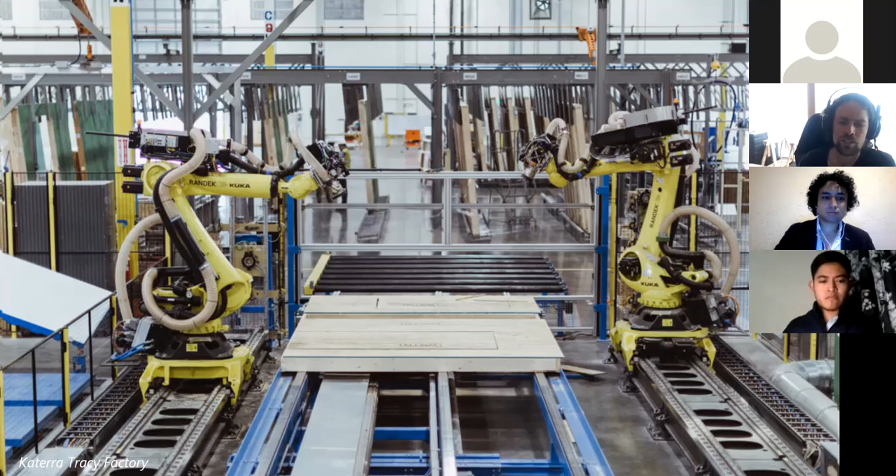And really that background and context is kind of a reaction to the trend that we're seeing in our industry at the moment towards industrialized construction. So companies like Katerra, I'm not sure if anyone's heard of Katerra before, but they're technically a startup that's trying to own the entire production chain for the manufacturing of buildings. Companies like Katerra, they're trying to standardize and automate this entire production chain so that they can extract every little bit of value from that chain and make money.

And the way that they're doing that is they're able to make money by essentially making the fabrication process less risky, more precise, more repeatable, cheaper, faster. That's what they're achieving by implementing industrialized construction processes, you know, automating things with robots and what have you.

Now, for companies like Katerra, and generally speaking in this future where we're building buildings within factory environments with machines, the role of the architect is going to be that of a specifier. So the architect is going to largely be selecting finishes and modules from a predetermined kit of parts that have been highly optimized for this particular production chain. That's what an architect will do. And I think that future is quite dystopian. I think that we're at risk of optimizing out what is exciting about architecture and design in the pursuit of efficiency and profit.

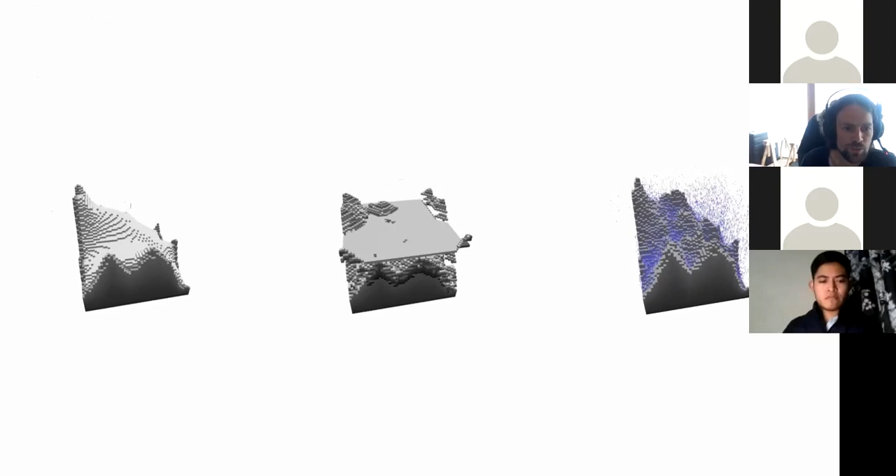So when I began my research agenda, which is all just leading up to what we're doing at Hologram, I had pretty limited time and resources to explore this idea of slow robotic fabrication. And so the only way to really explore the agenda was through simulated digital worlds. So trying to essentially speculate on what might happen if you had a robotic system gradually fabricating something over time, rather than literally doing that with robotic systems. Just didn't have the resources.

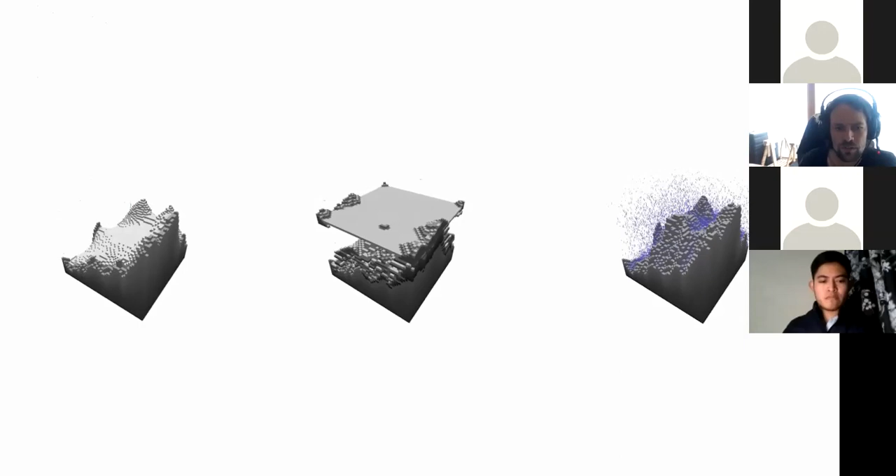So it became important as a designer to be able to build design tools that could simulate physical phenomena over virtual timeframes. So these are some examples of little miniature worlds that are doing these things. They're simulating processes of material erosion or material deposition or flow over a landscape over time. And by combining these simulated phenomena, it becomes possible to produce really, really complex formal objects, and to begin to speculate again on these kinds of qualities that just emerge by having, in this case, a fictional simulated robotic agent take very specific actions within that environment in order to produce desirable formal and spatial effects.

So again, the idea here is it's something which is slow, it's something which is specific to material behaviors, it's a kind of negotiation between the intention of a designer and the characteristics of an environment and a material. It's something which is definitely not standardized, precise, repeatable. It's something which has nuance, specific character. And in this case, these are a bunch of salt landscapes. It was the first speculation on what sorts of objects these processes might produce.

Then after doing that kind of work, these initial speculations which are all just virtual, I began also thinking about how this might work at smaller scale. So this is a project for a meeting pod at RMIT. And it was a competition. Essentially, the idea was to create a meeting pod by robotically depositing extruded and inflated recycled plastic bubbles.

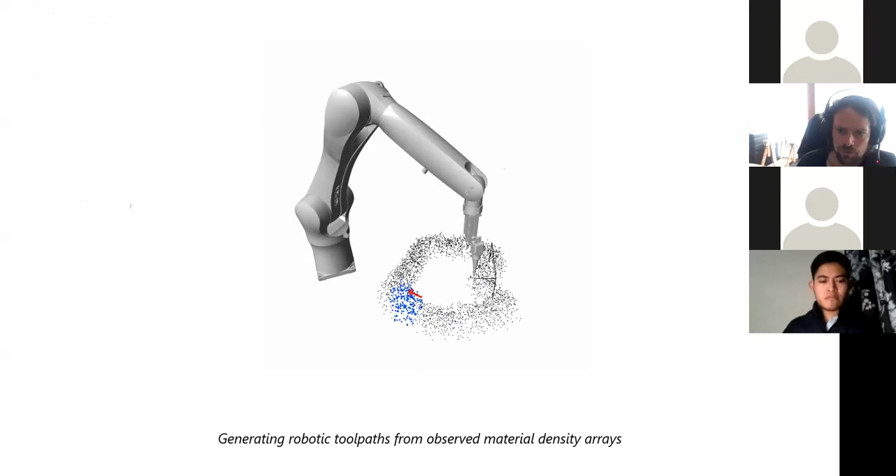So the first thing that we tried to do to build this impossible to build pavilion was to solve the computer vision problem. So the robot, in order to fabricate structures like this, really needs to be able to see the space that it's in. So we set up an environment where we had multiple scanners. Some were mounted to the robot, some were just set up in the environment, that could produce essentially a 3D model in real time of the material that the robot was working with.

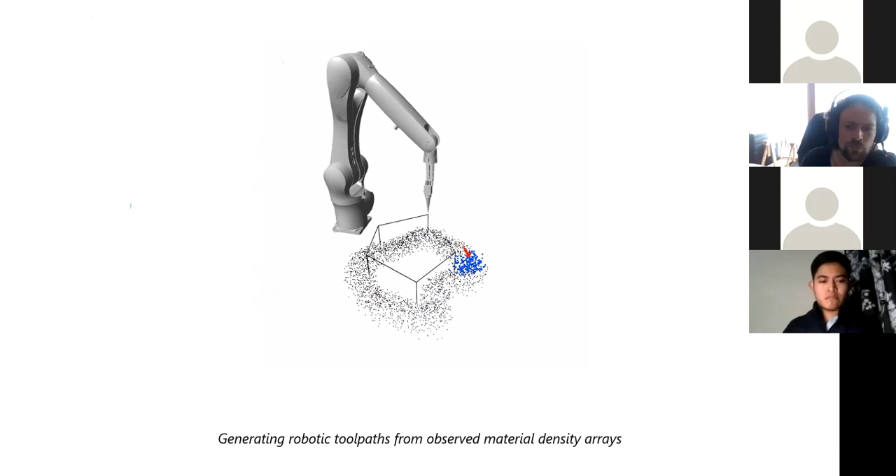And then we ran essentially behavioral models that would control where the robot moved. So it would observe this point cloud of its environment, or actually it was a voxel grid. It would observe that voxel grid. It would run some algorithms to determine how it should move next. It would place some more material. That would then affect the voxel grid, and it would just repeat. So you have these completely bottom-up autonomous systems of fabrication.

This is what that looks like running. So this was in 2016 in a workshop with Roland actually, and Cam Newnham for RobArch. And the robot here is depositing some expanding foam. It's basically always scanning that model that it's creating from foam, and then deciding where to place more foam following a behavioral model. The behavioral model is really simple in this case. It's just trying to put more foam on top of the foam that it can see. So you have this tower building behavior, basically.

So this is something that's extremely simple to do for a person. If you asked just about anyone to just put more foam on top of the foam that's there, anyone would be able to do that. It's trivial. But for a robot, this is actually a fairly challenging task. You end up having to develop a ton of different systems just to place material on top of what's already there. And so that also is kind of frustrating. It's just extremely difficult to teach machines to do what is extremely simple for people a lot of the time, especially when it comes to craft-based practices where you're trying to respond to material.

But essentially, as a proof of concept, we solved the computer vision problem. It's possible to observe material and place more material on top of what's already there. So that got solved. And then the next challenge was to try to work out how we could extrude this plastic. So the plastic in the DAB pod, we wanted to be able to control the color of the plastic. We had to control the size of the bubble that was being placed. You had to control the density of the material. There are a whole lot of things that we needed to be able to control directly from digital models, essentially, in real time.

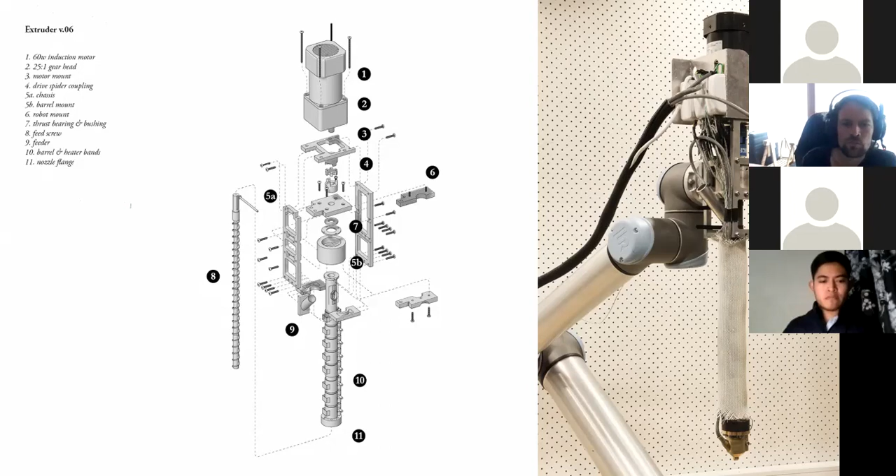Ours was very limited by having to go on the end of one of these UR10 robots, which is a pretty low payload robot, it's about 10 kilos. But what was special about our plastic extruder is we had the ability to mount custom dies on the end of the extruder. So you didn't just have to extrude a solid section of plastic like most 3D printers, but you could pretty much design whatever profile you wanted and then extrude that.

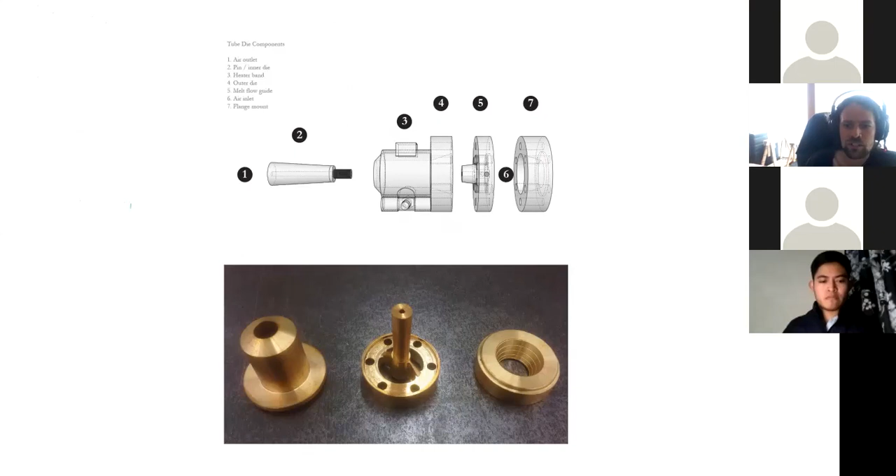So we designed a tube die that would go on the end of our plastic extruder, and this tube die had an air inlet built into the center of it. So you could control the amount of air pressure that was being pushed into the center of this tube while you're extruding it. And when you control that air pressure with a digital pressure regulator, you can basically drag a slider in Grasshopper and change how much air is being blown into the center of this tube. So while you're extruding it, you can also be inflating it.

And this was also really, really interesting. We were basically able to make these kind of inflated plastic bubbles entirely controlled through a slider in Grasshopper while the robot was printing. And they had a whole lot of characters that we didn't anticipate in our digital models. Essentially the plastic behaved in a far more complex way than we were simulating. It produced all of these strange ridges and ribs in the extrusion, which also reinforced the bubbles. So these were extremely thin-walled plastic bubbles, thinner than a Coke bottle, but they were also quite strong because of the way these ridges reinforce them.

And so I think there was a really interesting opportunity here to do so many things at once. First of all, printing with tube that's inflated is way faster than printing with solid section because you're extruding the same amount of material to create way more volume. So it's a faster fabrication process. That also means you're using less material, so it's a far less wasteful process, which is great. What you're producing is more performative. If you're trying to create insulation, for instance, this is a fantastic way to do it, extruding tube rather than extruding solid section.

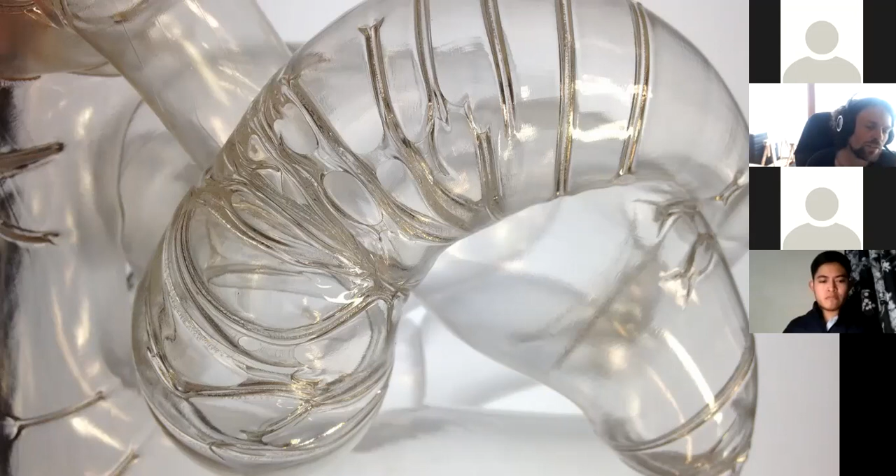So at this point, we'd proven it was possible to control the robot in real time. It was possible to make tools that would be able to extrude and control this plastic. It was possible to autonomously write behavioral systems that would allow the robot to fabricate structures of the complexity of that pavilion design. But this was also about the same time that we got the HoloLens. So this was late 2016, about almost 4 years ago. We got the HoloLens at RMIT, and when we got the HoloLens, we realized that we could achieve all of the same things without needing to go through all of the hoops of programming robotic arms.

So I'm just going to check, I don't have my chat window open, so I'm just going to turn it on now that I've got a second. I'll check this chat every now and again. So if you guys do have a question or want to interrupt, either just turn your microphone on and interrupt me or ask it in chat. But I'll try to check it.

Yeah, so we got the HoloLens, and what I wanted to do is essentially show you a very behind the scenes look at what we did with the headset when we first got it, because often in these sorts of talks, you only show the things that work really, really well. You don't show the failures or the stupid ideas that you have when you first try something. And I thought this is a good opportunity to actually share those with you.

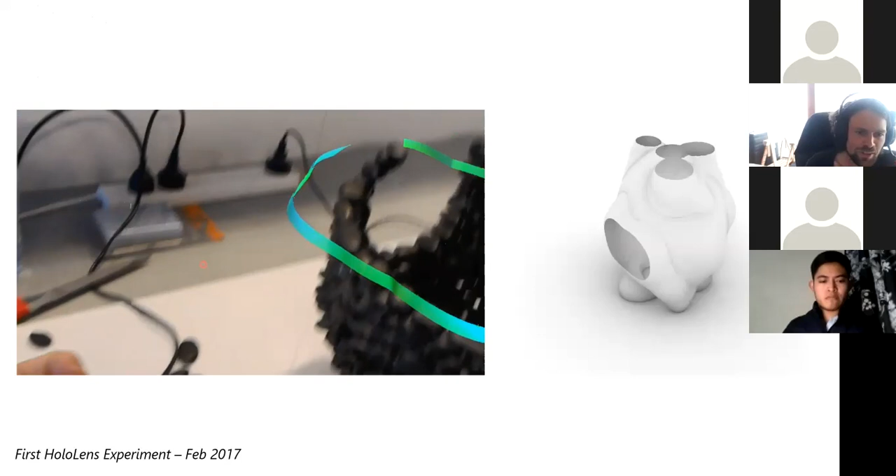So one of the first things that we did with the headset was, let me just make sure that plays. We thought, okay, maybe we can invent new 3D printing processes. So maybe we could print with river pebbles, which are all these strange and different shapes, and hot glue, rather than printing with entirely predictable standardized materials. So we got the HoloLens, we modeled some weird little blobby thing that we thought would be difficult to build without the HoloLens. Then we got some river pebbles and just experimented with different ways of communicating in mixed reality how to make this shape.

So what you see here is we're just looking at one section of the shape at a time. It's sort of like one layer, I guess, of these river pebbles. And we built some software that would just let us fabricate things like this as easily as possible.

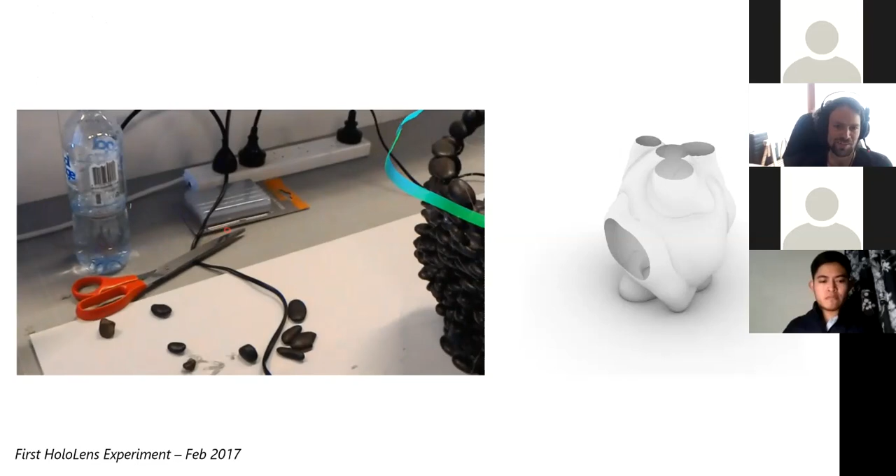So what we figured out very quickly that we needed to do was, we weren't really sure what information we'd need to build these objects. We didn't know if showing a contour like this was going to be best, or showing the whole model would be best, if coloring it would be useful, or if we should show it as a point cloud. We didn't know if we'd want to change things, move it around. All of these were just unknown.

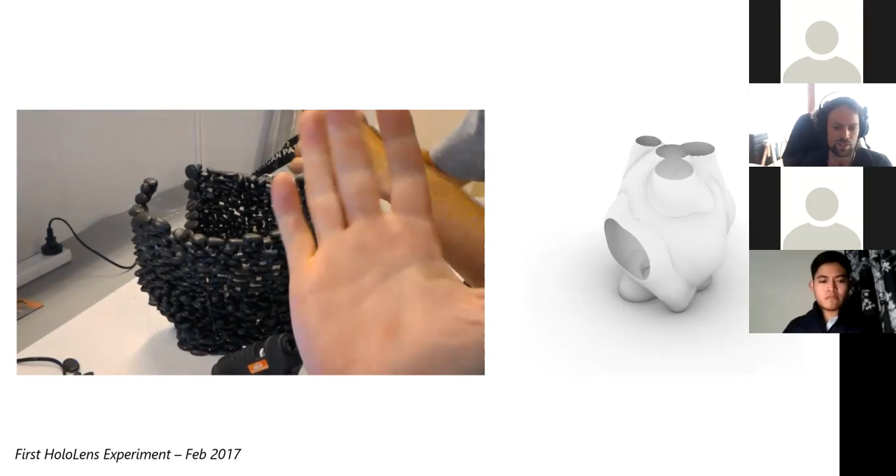And so we had to make some software that let us make all of these changes to what we saw on the headset as quickly as possible, so that we could test ideas and work out how the headset was actually going to be useful to build things. What we initially did was we sort of mocked up a way to stream Rhino models to the HoloLens. So what you see in Rhino, you would see on the headset.

And then with a bunch of students at RMIT, we sort of tested this out building different structures. So you would model something in Rhino, you'd look at that same model on the headset, and then you try and build it. And what that let us do is basically eliminate all of the complexity which normally goes into any sort of digital fabrication process.

So ordinarily, if you're doing something with digital fabrication, there's a ton of work that goes into rationalizing your design into 2D parts so you can laser cut it, or designing funny little connection details so you can join 2D parts together. All of this is very skill intensive and results in a really steep learning curve.

And by instead just allowing students to draw something and send that over to the headset and then just fabricate it by welding little bits of steel rod together, it meant that this kind of feedback loop of designing and then building and then learning was just way quicker, which meant that you could develop skills also much faster.

So it eliminates this kind of stuff, where you might have a whole bunch of digitally fabricated parts, but then you just have tons and tons of drawn documentation that shows in a very complex way how to assemble those parts together into some object. We basically want to avoid this as much as we can when you're working with mixed reality.

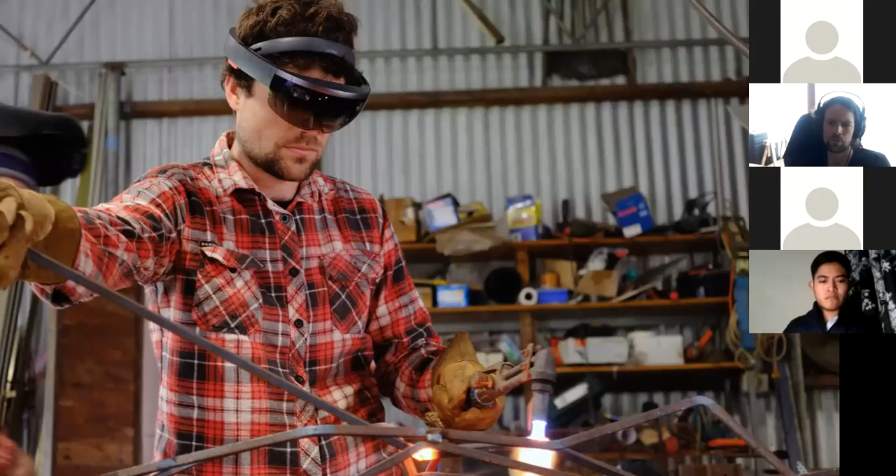So working from holographic models, we found, could invert the problem space of fabricating complex designs. By that, I mean, when you can see exactly what it is that you're trying to build while you're making it, it becomes possible to approximately build just about anything very easily. Doesn't matter how complex the form is, you can always approximately make it, and that's always really easy.

And ordinarily, with both traditional fabrication approaches and digital fabrication approaches, making things which are complex is usually all or nothing. So you either get it exactly right, and that's usually very difficult, or you get nothing if the part fails. It's not really possible usually to make things approximately, because that usually introduces a cumulative error.

So to give you an example, this is one of the first projects that we made out of construction scale materials with the HoloLens. It's 10 mil mild steel square bar. And this was just a quick digital mock-up for a chair designed in about 20 minutes. And it's very quick to design because there's no rationalization.

It's all unique parts, everything's intersecting, everything's in 3D, nothing's in 2D. There's really no fabrication constraints in this model whatsoever. It's just a 3D sketch. But it captures some design intent. It captures how big things should be, how the top of the chair should work, what the formal language should be, how the structure should work. All of that's in this sketch.

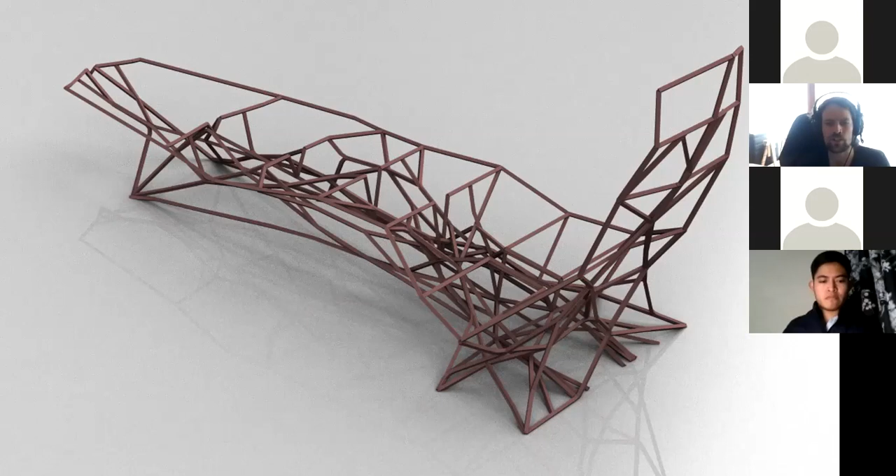You're heating up some steel and just bending it into the shapes that you see on the headset. It's an extremely simple fabrication process, and so it's extremely fast. So we didn't end up using a single drawing. There were no measurements, no templates, no jigs, nothing was laser cut, nothing was done robotically. Everything was just done by hand with an oxy torch, and that's it.

So we're slightly moving parts around whilst always making sure we're actually capturing the design intent. You can always see what the finished object is supposed to look like. So if you change one part, you have to make sure it's still capturing that design intent. So it's a deliberately imprecise object.

This idea of making in mixed reality is definitely not actually new. Like we didn't come up with this idea. It's not our brilliant conception or anything. The idea of using mixed reality to make things has been around since the technology's conception. So two engineers at Boeing in 1992 first came up with the term augmented reality, and that was used to describe a system for assisting with the manufacturing of aircraft wiring.

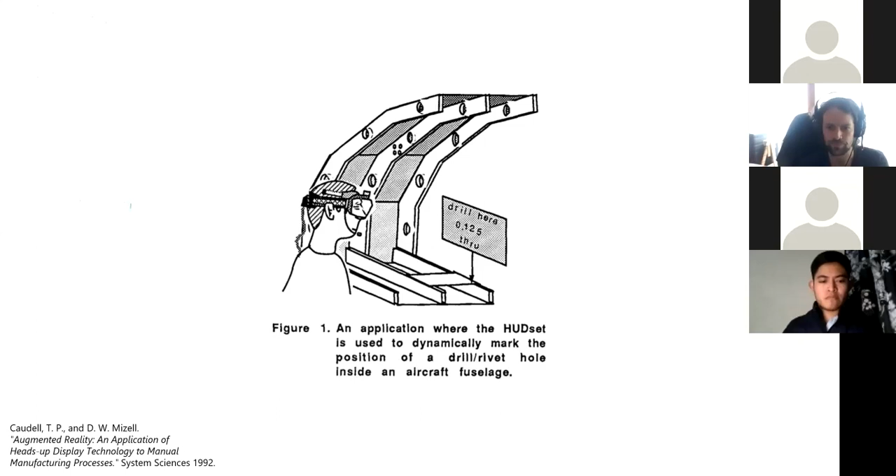However, very few people at least are building directly from these mixed reality models yet. That's what we're doing at Fologram. That's still fairly unique to what we're working on. Mostly they're just used for checking things after they've been built.

Now, compared to these mobile phone experiences, which are fairly commonplace, what we generally work with is the HoloLens, as I mentioned before. The massive advantage of the HoloLens over the mobile phone is that you wear it on your face, and so you can still use your hands to interact with your physical environment. You don't need to hold a phone in front of you, and you see holographic information with accurate depth perception. So you really experience things in 3D. You're not experiencing them as a 2D projection onto a screen, which again is essential if you're trying to use that holographic information to place something in 3D space. It's really hard to do from a 2D screen. It's really easy to do when you can see it in 3D space.

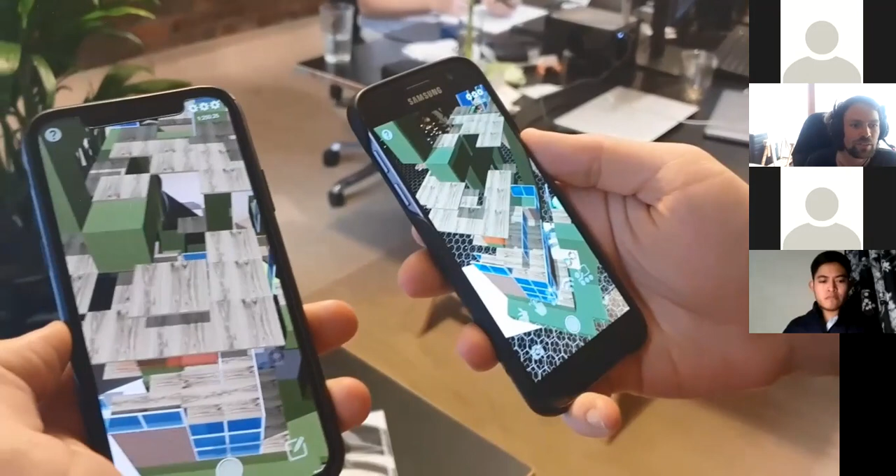The other thing that you can do is build multiplayer applications. So it's possible essentially to have 2 people or 10 people modeling into the same Rhino environment at the same time. So again, this is all built entirely just with Rhino and Grasshopper. It's a little application. It's a bit like Minecraft. It lets you copy a layer in Rhino and then paste the objects in that layer anywhere in space.

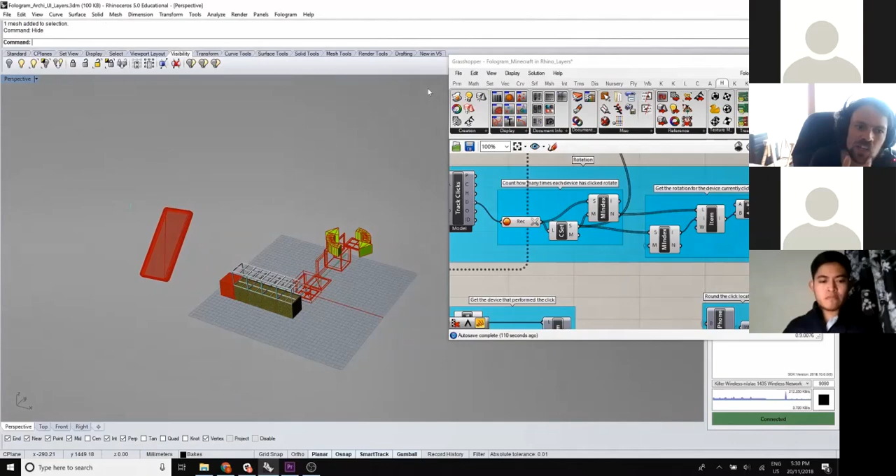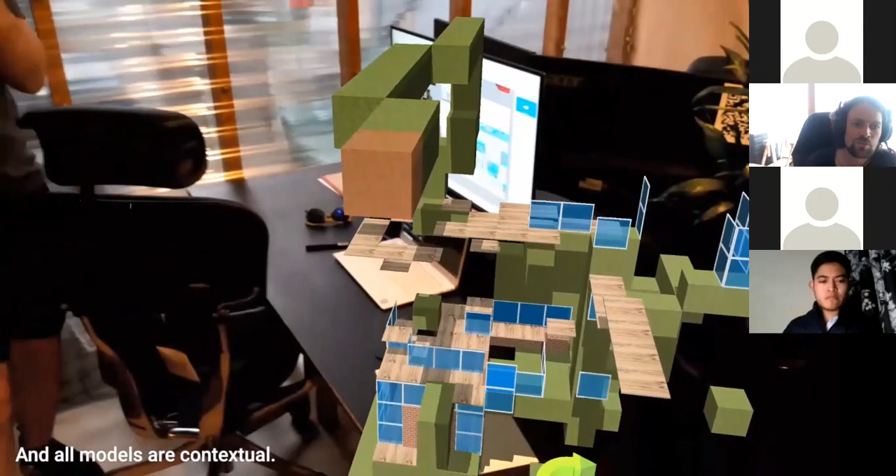And any mobile phone or HoloLens that's connected to Rhino can do this. So you can have multiple people all tapping and placing these blocks, and it just becomes like a collaborative modeling exercise, which is really, really great for engaging people who maybe aren't actually experts in those modeling tools within design processes.

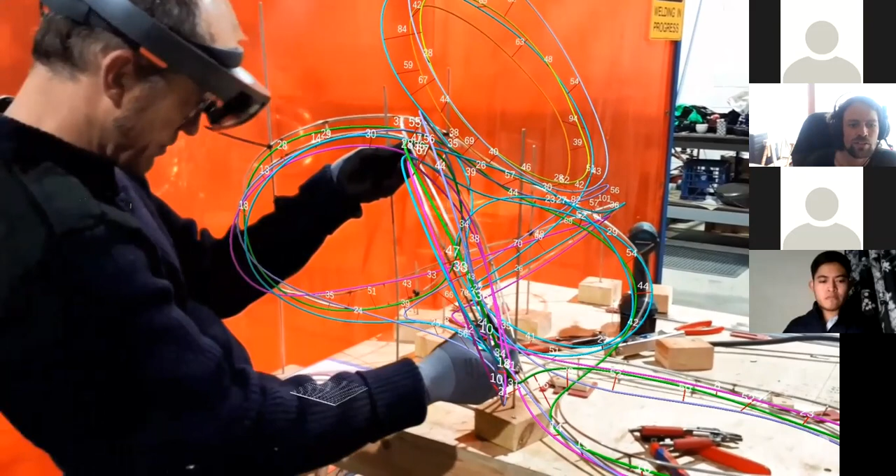We've had artists who work primarily in virtual reality use the HoloLens to fabricate these objects. So this is Jeff Farquhar Still. He designs these crazy complex 3D curved objects that are really difficult to make from drawings. And with the HoloLens, you're able to just look at them in 3D space and fabricate them, just as easily as anything else.

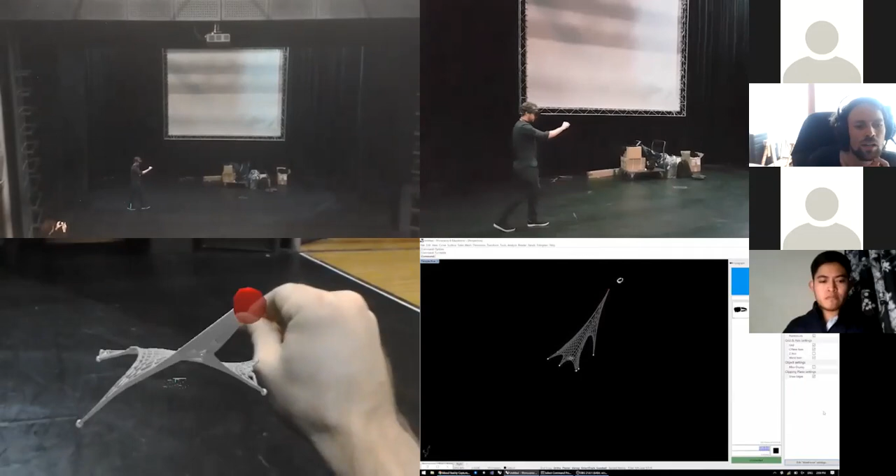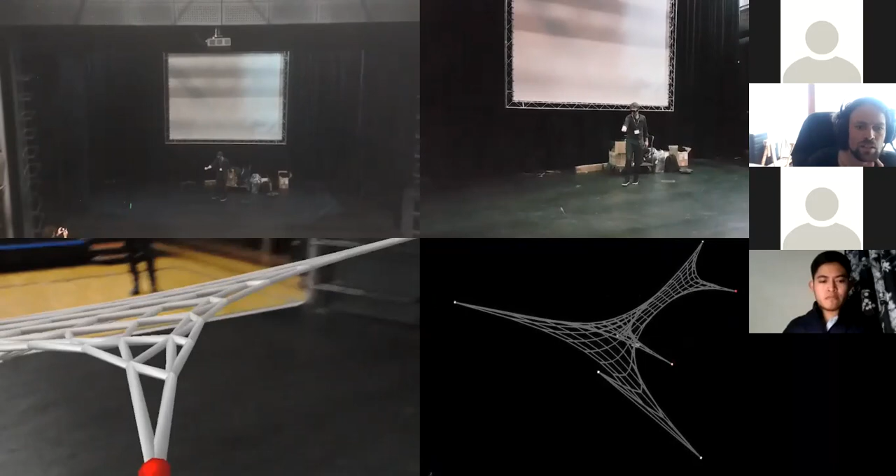You can interact with Kangaroo simulations in mixed reality. So that lets you do things like run one-to-one full-scale physics simulations for simulating things like tensile nets. It's possible to run robotic simulations from Grasshopper and align the coordinate space of the robot with the coordinate space of the HoloLens. So you can preview robotic toolpaths and things like that in mixed reality to avoid clashes or to anticipate exactly how a robot's going to move through its joint space. All of this is very possible and very simple using Fologram with Rhino and Grasshopper.

All right, so that is the full shebang in terms of the context, like how we got to where we got to. Now I want to show you, I think it's 2 or 3 projects in the next 20 minutes or so, to just try to, I guess, convince you of the effect and impact that mixed reality is going to have on design and fabrication.

And we've done a few of these demonstrator projects that have gotten more ambitious and more complex over time. The first one that we did was in 2018 at Tsinghua University in Beijing, where we just built a pretty simple little pavilion structure, but we designed it, did all the design review, all of the fabrication, all the assembly, and all the post-build analysis entirely in mixed reality. So we were trying to sort of prove that it was possible to do this end to end.

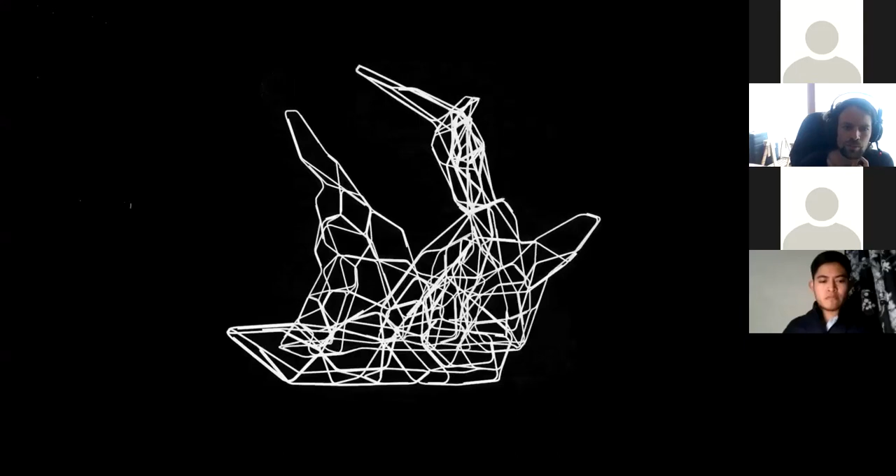So this is the design. It's like a very deliberately complex thing. It's a bunch of woven bent steel rods. They all kind of thread through one another. It's a real kind of tangled mess. And we're just trying to make something as formally complex as we could at the time. So that was the design.

And this is where we were building it. And because the site's pretty complex and the object we're making is pretty big, we wanted to make sure that we'd actually be able to fit all of the parts we're fabricating through this space and get it to the exhibition. And what you're seeing here is just the 3D scan of the space that's built up on the HoloLens as you walk around. So the HoloLens is always creating a 3D model of the space that it's in.

You can stream that point cloud straight into Rhino and Grasshopper and use it to determine, okay, will our part actually fit up this ramp? Is it going to fit under this soffit to get it into the exhibition space? Will we be able to fit it around the columns? All of those things are just really, really useful to know with this project. And again, we were able to determine them just with a site walk with the HoloLens.

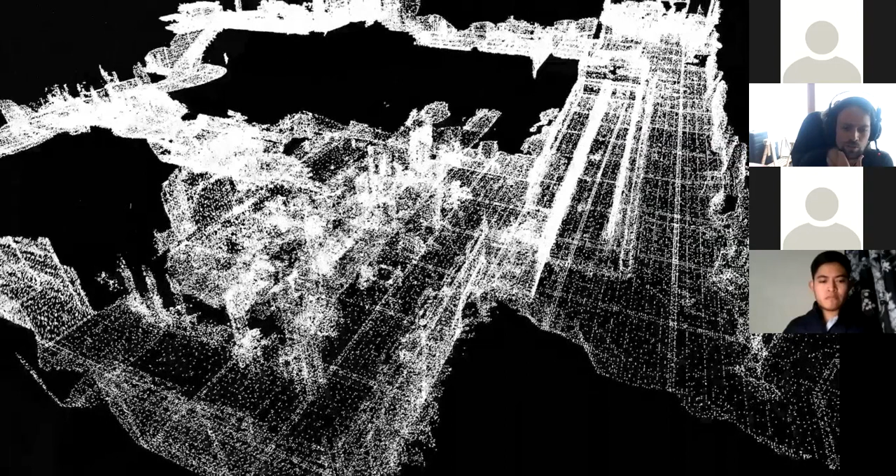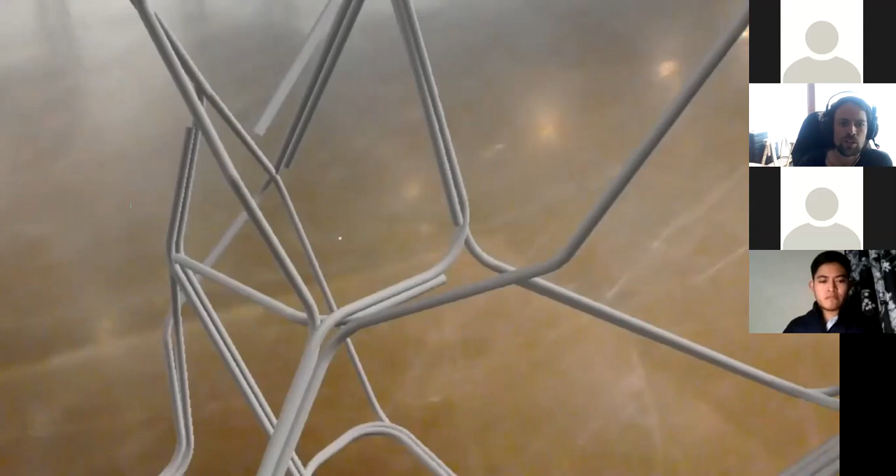Another thing that we did was to just make sure that this structure was buildable. So it's really, really hard to understand something that's composed primarily of curves when they're just projected flat on a screen. So things like being able to see how these curves would join, whether or not we were missing joints or had too many joints, whether the parts were intersecting, whether we needed more connecting pieces. All of this was just way, way faster if you were able to walk around the 3D object than spinning around it on screen.

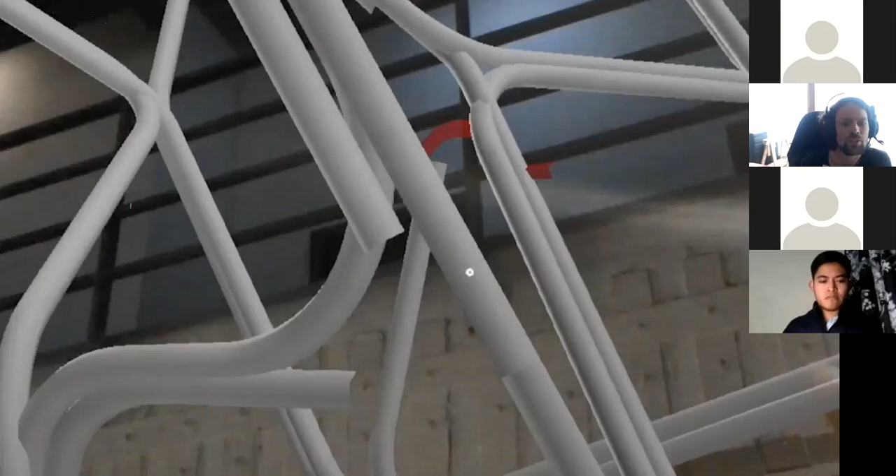And so what you're looking at here is both of those things happening at once. So I'm walking around wearing the HoloLens and just marking up this object. The markups are streamed straight back into Rhino. And then Cam was able to change the design model in real time, and I could just approve it. I could say, yep, that looks better. That's done, it's fixed. And so it's just a super, super fast review process.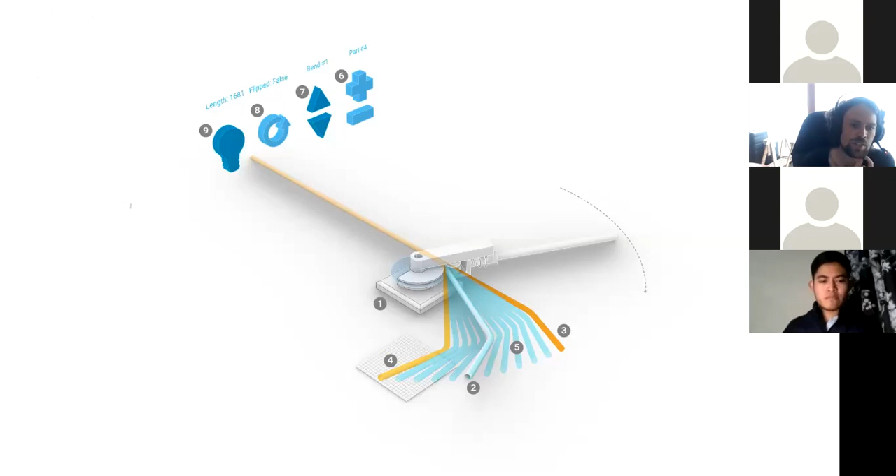Then to fabricate each one of the parts, we had very little budget. And so we built all of these parts with an extremely cheap bender that you see in the background here. And because each one of the parts was unique, we had a holographic guide which showed the geometry of each one of these bent pieces. And we had an interactive application that let us step through the individual bends in each one of those pieces so that you could just focus on that specific fabrication information, one thing at a time.

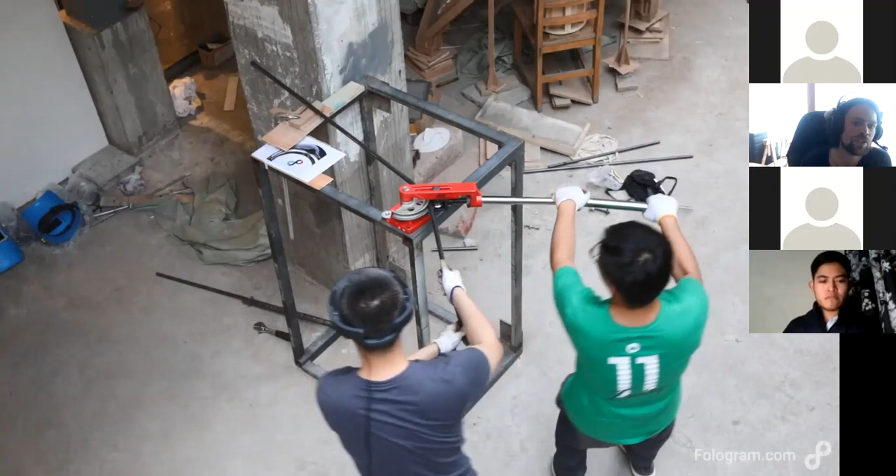Just like with the Boeing diagram that I showed you earlier, the critical thing you need when you're fabricating something with a HoloLens is to just minimize the amount of digital information you're showing to help you perform some otherwise complex, challenging task. So here we have the students following these holographic guides, bending these pieces. You can see up here, there's the interface they're using to step through these individual bends.

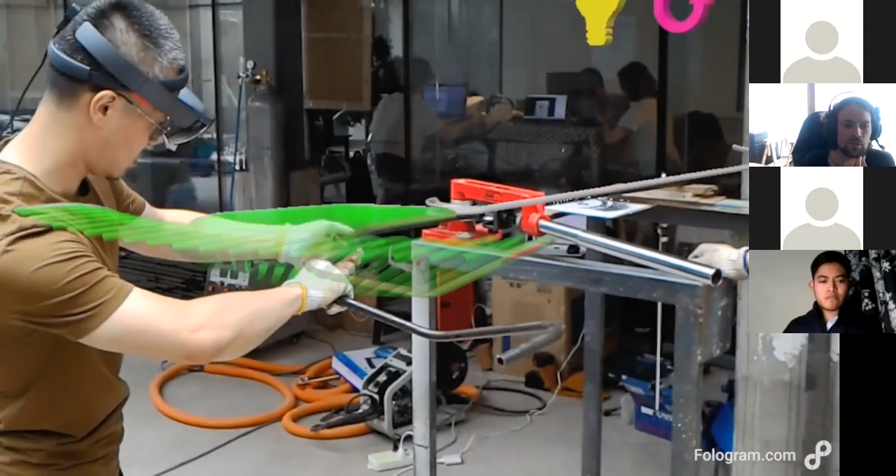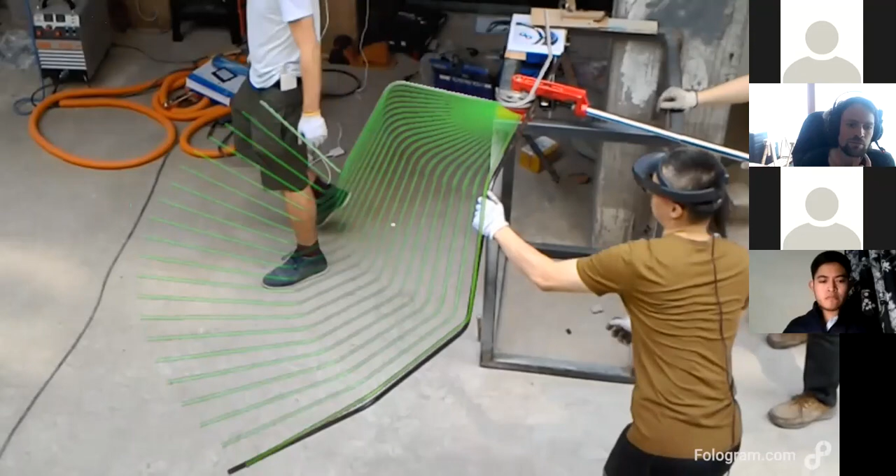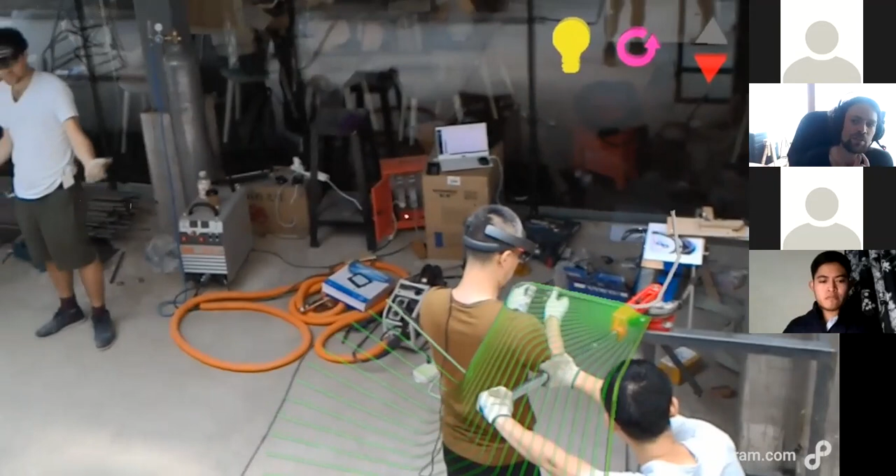And to fabricate each part, it's really, really simple. All you're doing is lining up the physical pipe after it's been bent with the virtual pipe, and then just bending it around until it continues to line up. So here you see them doing that bending. Once it lines up with the hologram, you know it's right. So there's no measurements, no drawings, no labels, no templates, no jigs, no nothing. Just bend it and then assemble it.

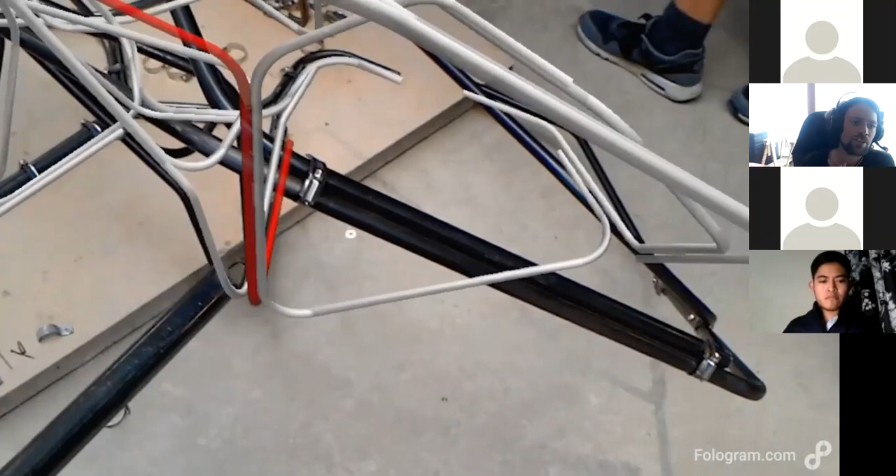So that massively simplifies the documentation that we need to do. We can rely on the fabrication team to make intelligent decisions during assembly and build things up without a cumulative error. So here you can see the red piece. We had another really, really simple interface that lets you step through the current piece being assembled and just check that they're all in the right place.

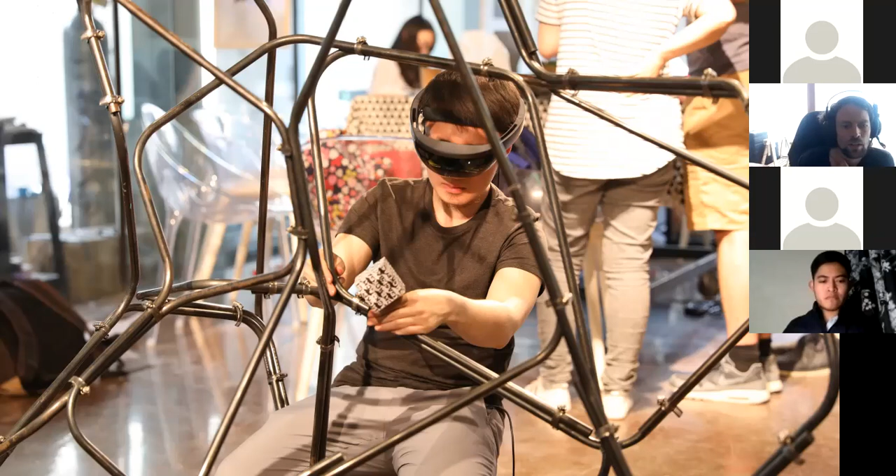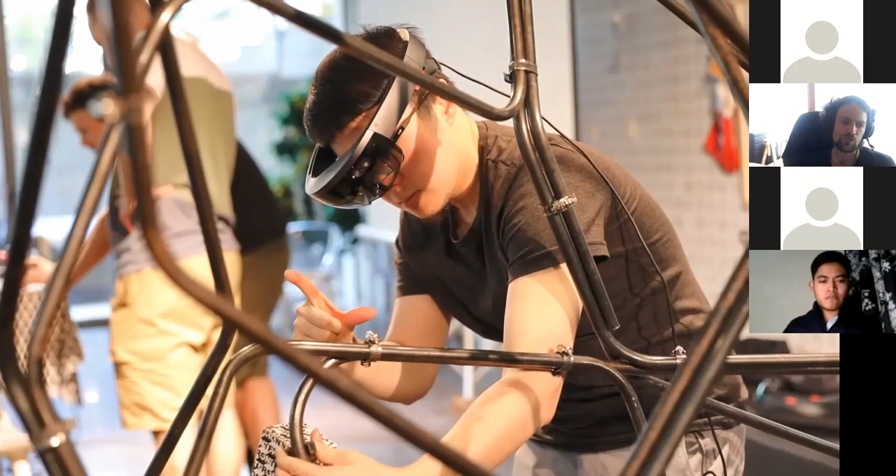Once it had been built, we wanted to digitize it to make sure that it was precise, or at least to be able to say how precise it was. And yet again, as always, we used the HoloLens to do that. So we were able to track a marker with the HoloLens, just a printed fiducial marker, and take the tracked position into Grasshopper and essentially just place points in space and redraw the curves of the physical structure so that we had a digital model that exactly overlaid that physical object.

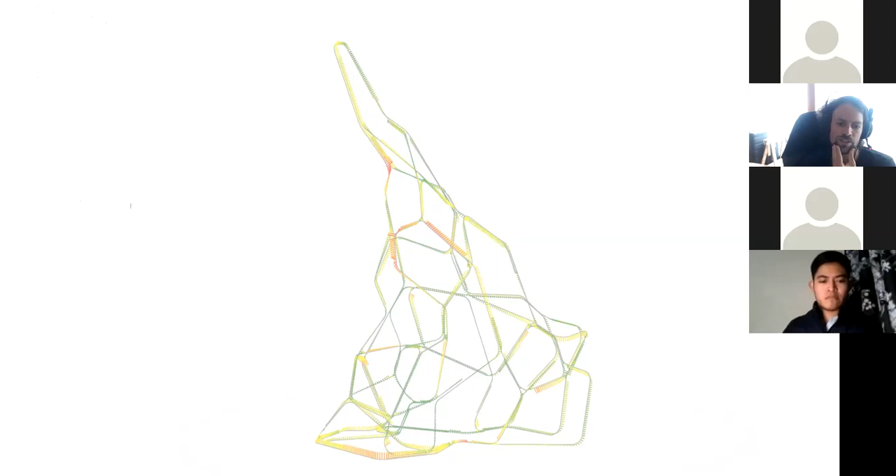So then we could compare what our original digital model was, so the model that we used to fabricate the object, which is this one here, with our digitized model, which is this one here, also showing the deflections, and just measure the difference. So this is before build, this is after build. And then that's the actual physical thing.

So what we found was the maximum deflection of this object, I think, was about 25 millimeters, and the average was 16 millimeters. And this is from 16 millimeter tube. So that precision, for something that's made entirely by hand by people who are using the HoloLens and a bender for the first time, is entirely acceptable.

We've also tried working with the HoloLens on construction sites. So not doing really sculptural pieces, but trying to work with industry and with trades, specifically with bricklayers. And the reason that we're able to essentially engage trades with new technologies is three reasons. One is it's very easy, we've found, to get tradespeople to engage with the HoloLens because they don't really need to learn any new user interfaces. You just put the headset on. If you see a big button, you can reach out and push it. That's easy enough for anyone to do. It doesn't require a lot of expertise just to use the device.

The other reason that we've got a lot of uptake is these mixed reality experiences, they're always shared. So you can easily train somebody, walk them through what they should be seeing, walk them through how to interact with the digital content and all the rest of it, just by both wearing a HoloLens, both looking at the same model in the same place.

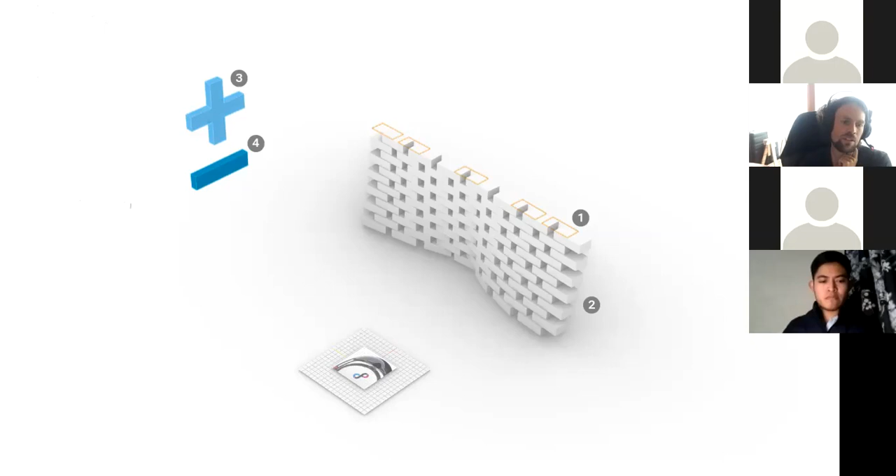Initially, we were just doing really, really simple prototypes ourselves from foam blocks, extremely simple mixed reality applications. So you have two buttons that you can interact with on the HoloLens for changing the course of bricks that you see. And you're using that holographic information just to place bricks. It's extremely fast to use these applications.

So this was a structure we built of about 4,000 foam bricks. Oh no, sorry, it's about 2,500 foam bricks, I think. And it took about 4 hours to build. It gives you an idea of the precision of these processes, because basically if any of these bricks are in the wrong spot, they really stand out. And so we thought that was a good enough test to try doing this at full scale with mortar.

And I've just got a little video that shows you how that went. Now this video does have some rude language in it that's not beeped, I think. So if you are offended by that, maybe just mute your audio for the next couple of minutes or so.

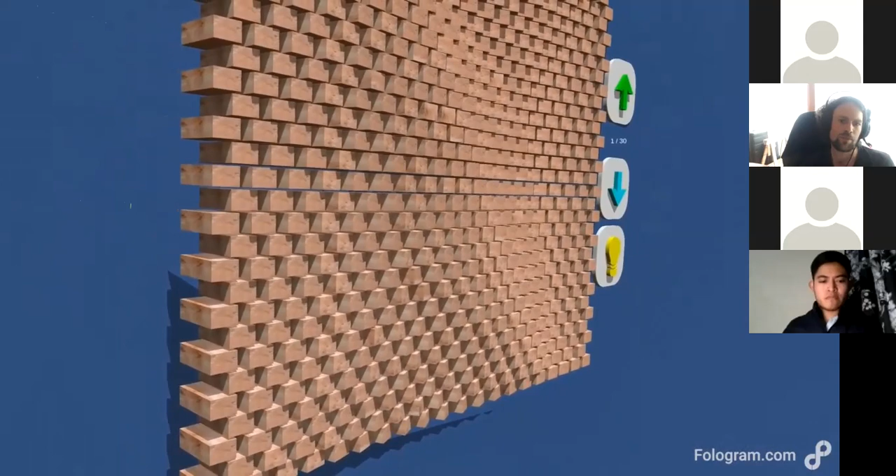So this is the project. It's a small feature wall, about 600 bricks. This is the digital model, really simple holographic information, and showing you all the bricks. And this is Colin talking about it.

There isn't a single brick on there that lines up to anything. Every brick is different. This would take you like 2 weeks. Yeah. For one guy, and a lot of that would have to be, you know, made up. Do you know what I mean? You're not going to get it exactly like this would be.

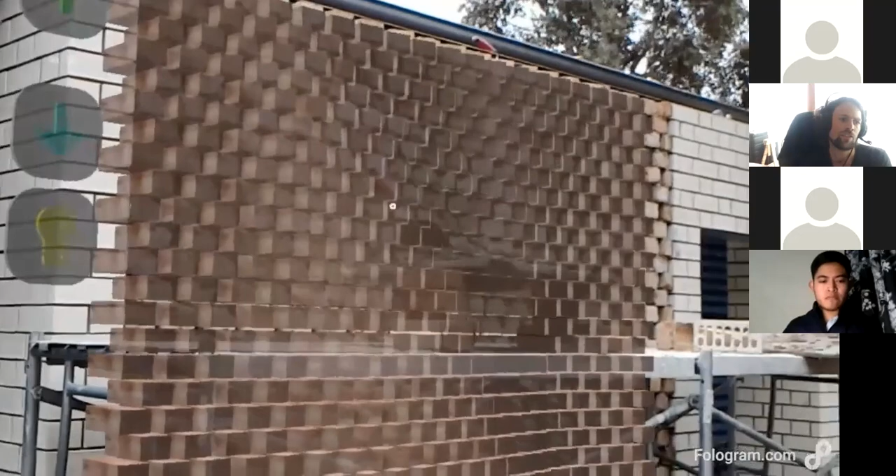So they're using that same interface. Basically, you have multiple people able to look at the courses of bricks as a hologram, and they could use that for all sorts of things, not just placing the bricks, but also training apprentices in how to do brickwork, which was really, really exciting.

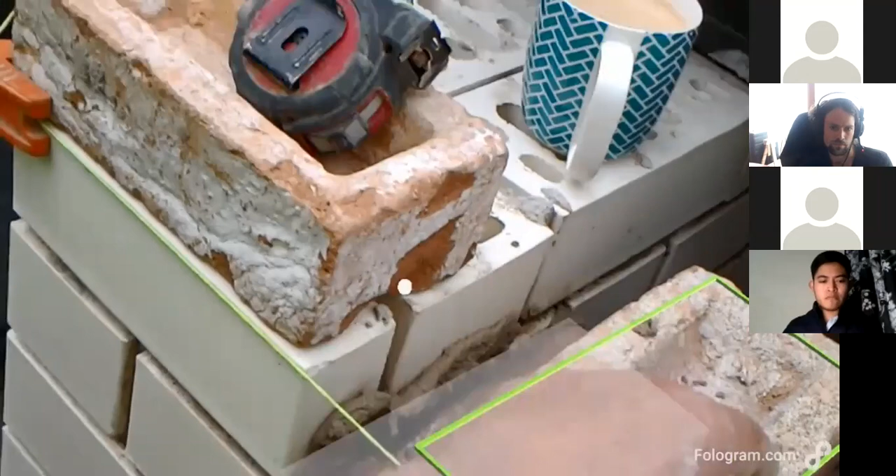So that's all the bricks, right? Yep. So see how you are here. That one's good. Yep. This one here shows it's got to come round. So just treat that like you do your string line all the way around. Mm-hmm. Hit that back.

And we found that working with the brickies, they were basically developing their own new construction techniques while they were using the HoloLens. So they were able to build this wall in parallel, like multiple people doing it at once, where normally it would just have to be one really skilled guy. And they figured out how to make that as quick as possible.

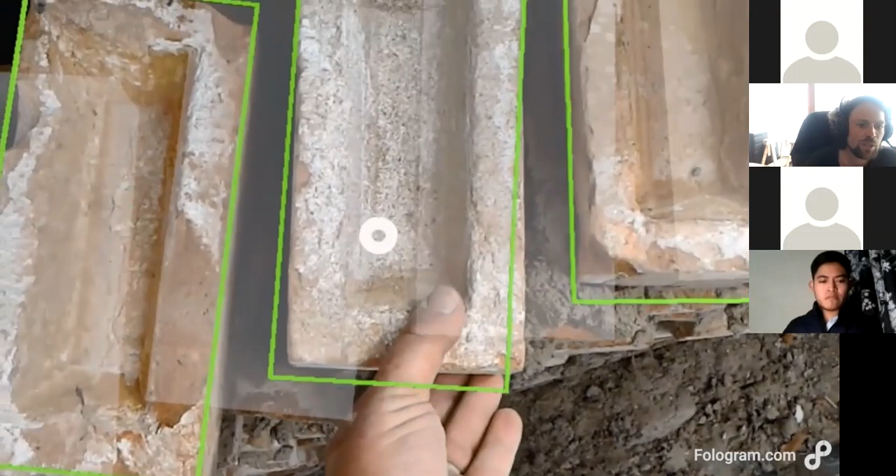So they had Colin going through and roughly placing the bricks, and then Ben going through and neatening them up, like you see here, getting them exactly right. And they just take so much care and precision in this work. Like, this is not just about doing something faster or cheaper, it's about doing something better, which is what you'll hear Colin say.

I once seen a program on John Lennon, you know, and he reckons every song that he made, he used to get scared that, fuck, I'm going to stop now because I'll never make anything better than that, you know. That's how I'm thinking, fuck, it's time to stop. I'm nervous that I can't make nothing better.

And we'll come back to Colin at the end of this talk, so I'm just going to keep moving on. Now, another project that we've done, like the most ambitious one by far, was to try to upscale the use of mixed reality. So, you know, larger than the brick project, larger than that bent steel project, in the design and construction of this pavilion in Tallinn.

Now, this pavilion project was a collaboration with just so many people. So the design team was myself and Cam Newnham from Fologram, along with Soomeen Hahm and Igor Pantic, who were both at the Bartlett at the time, and format engineers. So pretty large design team. And then we had an enormous team of volunteers and friends who basically helped us with prototyping and flew to Tallinn to help build the project as well.

And what I want to talk about is basically to convey the idea that working in mixed reality allows you to be extremely ambitious and take massive, massive risks in experimental architectural production. And I wanted to prove this, I guess, by talking through really the background of this project and showing you a lot of things we did that didn't work out before showing you sort of the end result of this process.

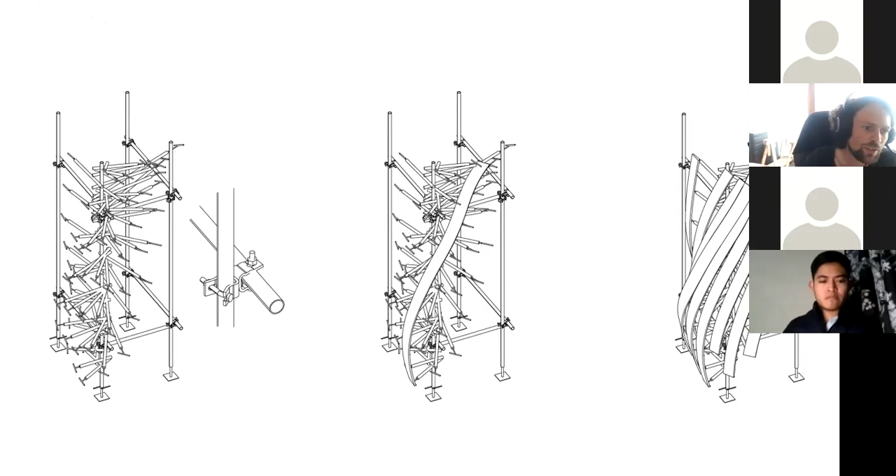And then we also thought it'd be really fun to try doing something with a sort of traditional craft practice. So, you know, steam bending timber is not something that happens very much anymore. But it's this really efficient way of making really quite complex forms. And so we thought, well, that'd be fantastic if we could work that out. We'd never actually steam bent any timber before when we started doing the competition. So this was in January of last year, 2019.

And over time, throughout the design phase, we basically gave up on the idea of building this. We thought, well, the idea is quite strong, but we don't actually know how to steam bend anything from timber. We don't know what the constraints are. So let's just do a project which demonstrates the formal potential of this application. So we really dialed the design complexity up to 1,000.

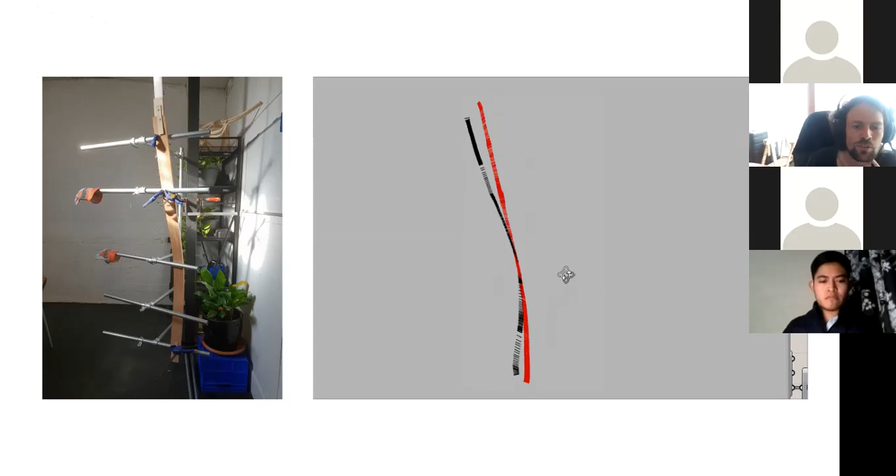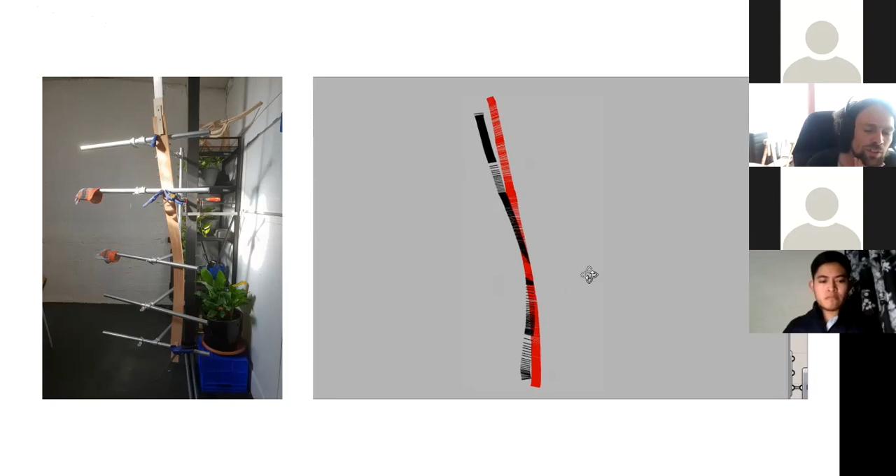And this is just a huge, huge problem. You can't make large, building-scale components out of things which are just the wrong shape. And so we needed to figure out a way to solve this problem. We really didn't want to just end up cladding some substructure. We thought that was a real cop-out on the original premise of the project.

And so we had to find a way for the structure to work as a shell, just using very, very minimal parts. So the initial idea was we would introduce rigidity to these timber parts by doing them in pairs. So what you see here is we have formwork, which is laid out on the ground instead of using 3D scaffolding.

And then you bend a piece of timber over that formwork, you attach a bunch of steel bracing to it, and then you bend a second piece of timber around that bracing. So now you have two pieces of timber with this bracing in between them. That forms a sort of rigid composite, and it can't spring back as much because the steel pieces are basically pinning it in shape, or at least that was the idea.

So we did a prototype. This is in May 2019. And this is our new formwork system. So we've just got pieces of timber now screw fixed to a false floor. Those pieces of timber are set out following a holographic guide.

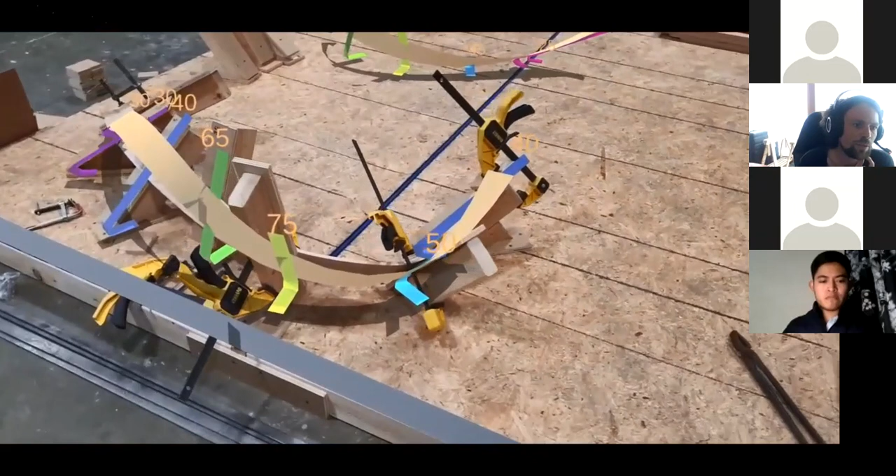So you can see these colored parts. They're showing what kinds of formwork need to go where. And then there's this yellow holographic strip, which is showing you the shape the timber needs to be. And then there's a piece of actual timber underneath that yellow holographic strip. So we've managed to fabricate and bend a piece of timber into this same shape. So making one piece like this, we proved that was possible.

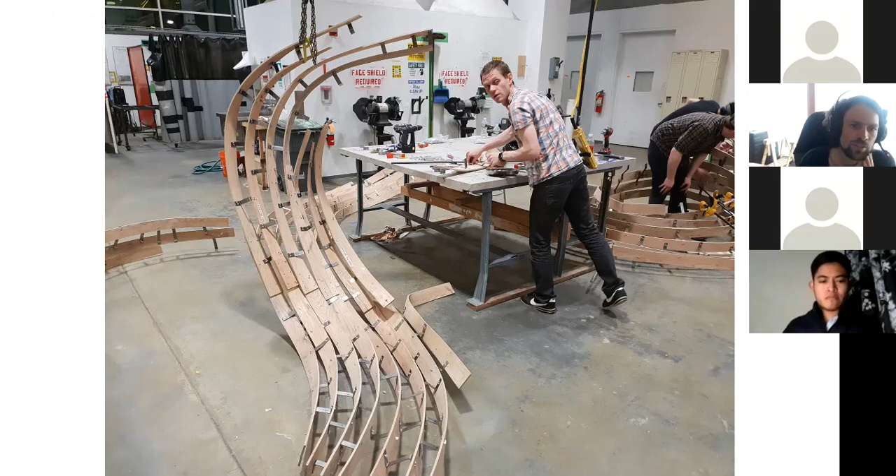And all these parts are pretty short. They're just little parts, and then they all get assembled together into these larger composites. So we made this huge prototype in 2 days. And this was at Temple University with Andrew Witt and Chris McAdams, Tim Rosterholtz, and James Pazzi, and then a whole lot of really fantastic students.

The prototype, essentially, sort of worked. You can see here we're getting these sweeping complex curves, but it was incredibly difficult to manage the spring back of the timber at the ends of the pieces. So within the middle of the curve, we didn't have any spring back because we were pinning these pieces with these steel brackets, but the ends would just straighten out.

And when we tried to join them end to end to make larger chunks, you would just end up with pieces which were a completely different shape to the digital model. So this prototype, even though it's just a 2-day exercise, utterly failed. So we were in May now, and we were due to start construction of the pavilion in July, and we still had no idea how we were going to build it. We could steam bend small parts, but that was about all we could do.

So in June, we did another prototype in another architecture school elsewhere in the world. So now this is at Aarhus in Denmark, with Ryan Hughes and Dagmar Reinhardt and another bunch of really fantastic students. And this time we had the great idea of, rather than breaking the pavilion up into small pieces and steam bending them individually, we'd do the opposite. We would try to make each of the pieces as long as possible so that you would never have joints end to end between pieces.

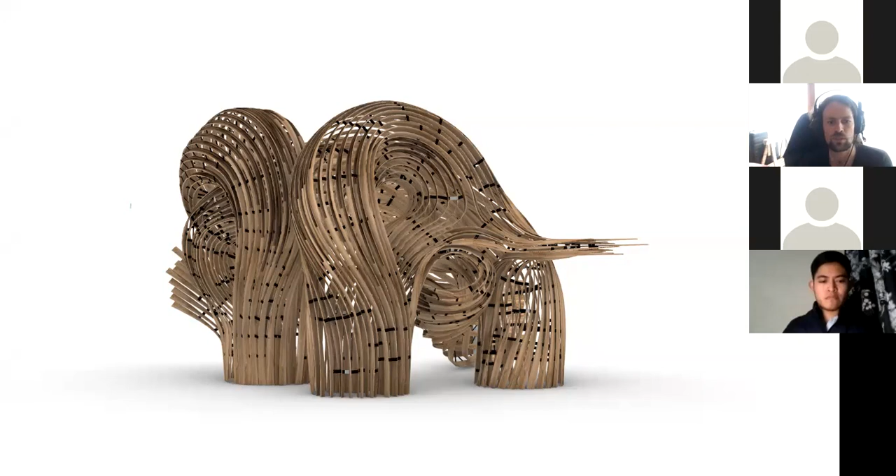So you could pin both ends and steam bend, and then you have like a 12-meter long piece of timber, steam bend it into the right shape in between the two of them. So that's how we had to rationalize the digital design. But we still rationalized it into something that was pretty goddamn complex.

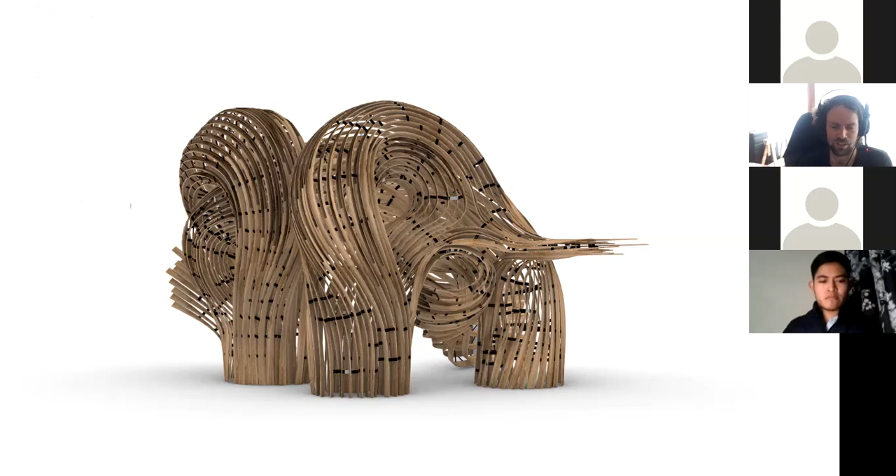Now, this rationalization was extremely difficult to do because we knew that there was going to be a whole lot of challenges when we were fabricating this pavilion. So it's one thing to digitally model things. It's much harder to digitally model things so that they actually behave in your digital model the same way they will when you physically manipulate a part.

So because all of our pieces of timber are these bendy, springy things, we really needed to make sure that what we were modeling in Rhino was something that was going to actually form into the same shape as our physical timber parts, because there wasn't any point drawing anything that couldn't actually be bent into a shape.

But that was just one of the many, many constraints that we had when we were working with these timber pieces. And that's because every single one of these timber parts, because of the budget of this pavilion, was made from exactly the same dimension of timber. So we just had timber boards, which were all exactly the same length and width and thickness, and we used those exact same boards to form every single one of these parts.

Nothing was laser cut or CNC cut. There's no prefabrication of parts. Everything had to be made from these straight lengths of timber. And so because of that, we had all these constraints we had to somehow digitally model. So we had to make sure that we weren't modeling anything where the curvature of the part exceeded what we could bend, so we'd minimize breakages.

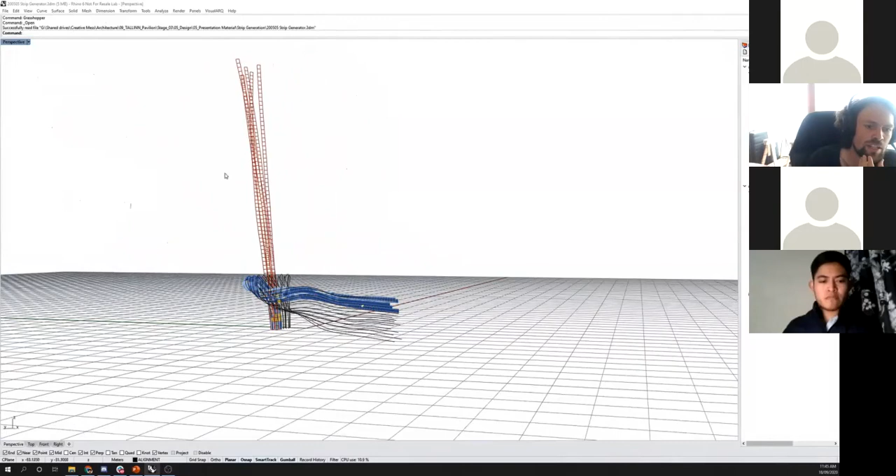And the most important one was that these 3D curved timber strips would unroll into straight, or as straight as possible, sections, so we can make them from planks. I think I was going to run this simulation again. You can see here how the geometry of the board is slightly changing because the physics simulator is trying to do two things. It's trying to make the board actually fabricatable.

So it's changing the shape of it so that it unrolls straight, but it's also trying to make sure that it matches the design intent as closely as possible. So it's not changing too much. It's this negotiation between what we drew, what we want, and what is actually possible with the material that we're working with, which is really interesting.

Now, this isn't actually a great way to model normally because the end result is only approximate. Like the boards don't perfectly unroll straight, and sometimes they slightly intersect and everything is rough. It's almost right, not exactly right. But because we're fabricating everything by hand using a hologram, that just doesn't actually matter. We only have a certain amount of precision that we can hit when we're working with a holographic guide anyway.

It's exactly like that steel chair that I showed you earlier. It's about capturing the design intent as closely as possible and minimizing the risk of some large, massive mistake, more so than it is about digital precision. Nothing is about digital precision in any of these projects.

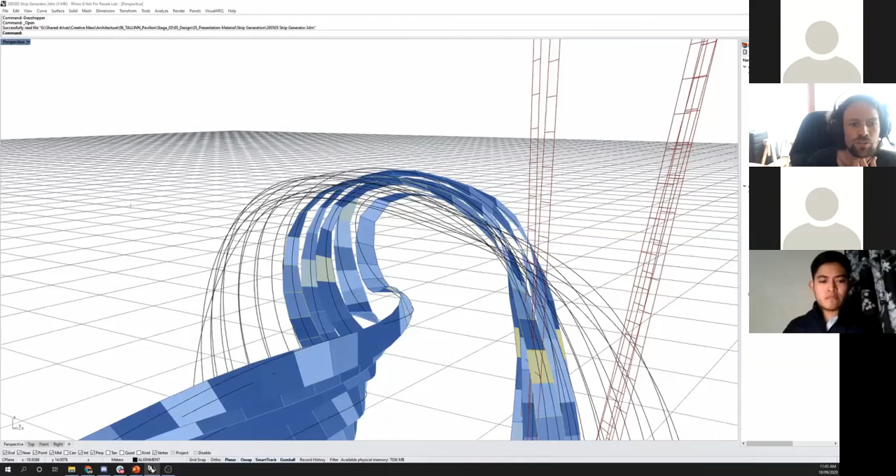It's about using the digital model to avoid the chance of catastrophic failure during construction. So this is how we modeled all the timber strips, basically by trying to simulate how material would behave, whilst also trying to match preconceived design intent. So these parts were sort of 12 meters long. We also used a holographic guide just to show exactly where the parts would need to bend. So the color that you see here is showing the curvature of the part in 3D.

So when we were laying up these boards, we could see, okay, it's going to bend a lot in this region. I'm going to make sure that I put a really nice piece of timber in this region where it's bending. And where we have crappy cheap timber that's split or has knots, I'm going to put that into regions where it's not bending too much. And this is coming back to that point I made earlier about using, let's say, non-standard materials in construction. So we were able to use really low-grade timber because we knew how we could distribute our material to minimize the risk of things actually breaking.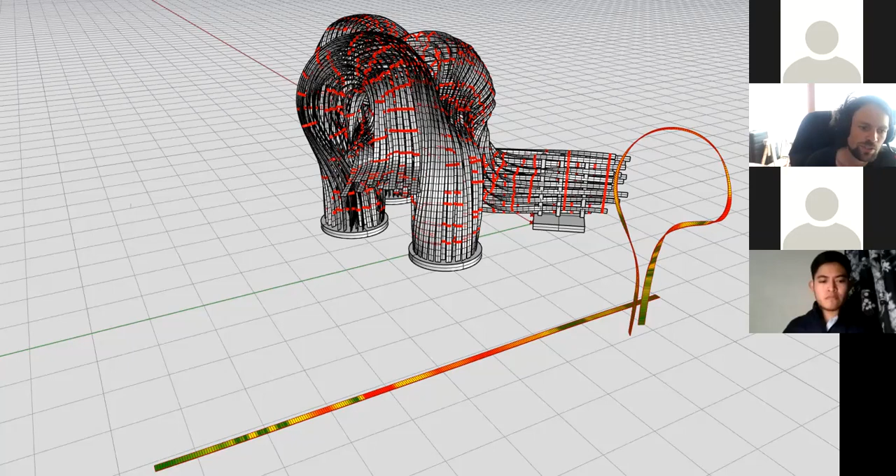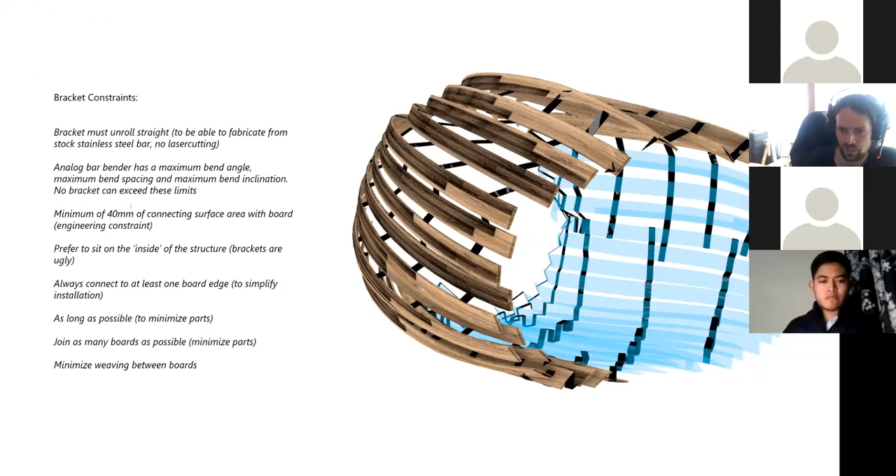Steel brackets in the pavilion, pretty similar deal, just tons and tons of constraints that we had to model. Again, all these brackets were made out of just 40 mil flat bar. So there was no digital fabrication of any of these either, no laser cutting, no CNC cutting, everything's just a standard length of material. But they were much, much more complex to model because of all of these timber boards. The constraints for the brackets are you always want them to sit on the inside. They have to connect boards as much as possible. You need to be able to actually fit them in the structure. They need to be bendable with an analog bar bender. There were just an awful lot of constraints for these brackets.

And so the only way to fabricate these as well was to, again, use a physics solver to digitally simulate a few of these constraints. So what you see here is, again, we did a rough model. Basically it's a parametric model to try to get the bracket as good as we possibly could. And that then has a whole lot of problems with it. You can see that it's not properly touching the boards. It doesn't unroll straight. Some of these bends are too tight to be bent. And then the physics solver just goes through and tries to solve as many of those constraints as possible by adjusting the bracket geometry to make the part unroll straight, whilst still trying to maximize the design intent, like the shape of the bracket that we actually wanted.

All right, now let's see how the whole thing was built. So we've got about 5 more minutes in this presentation, I reckon, and then we can do some questions, hopefully, or you can all go to sleep, a long day.

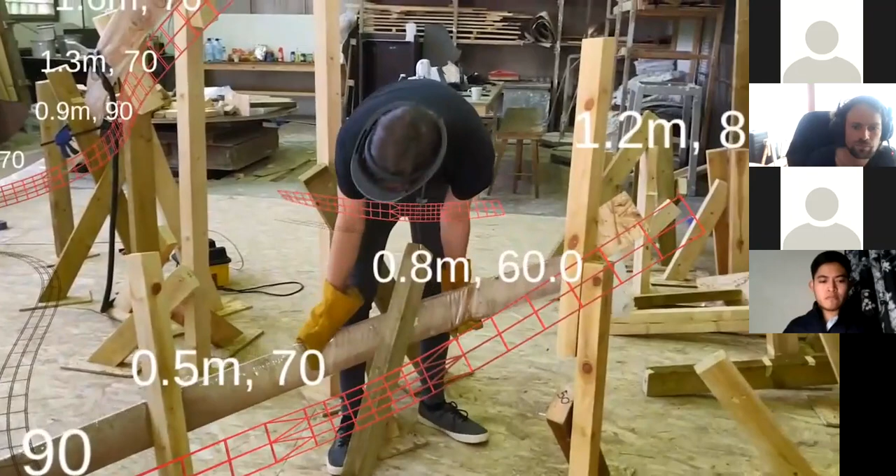So how we fabricated these parts is you have a holographic guide showing you the shape of each strip. The 12-meter long piece of timber is in this bag. It's extremely hot. It's getting steamed all the time during bending. And you're just using a team of people to gradually guide this piece of timber into the shape that you see on the HoloLens. And then you're just clamping it off in place.

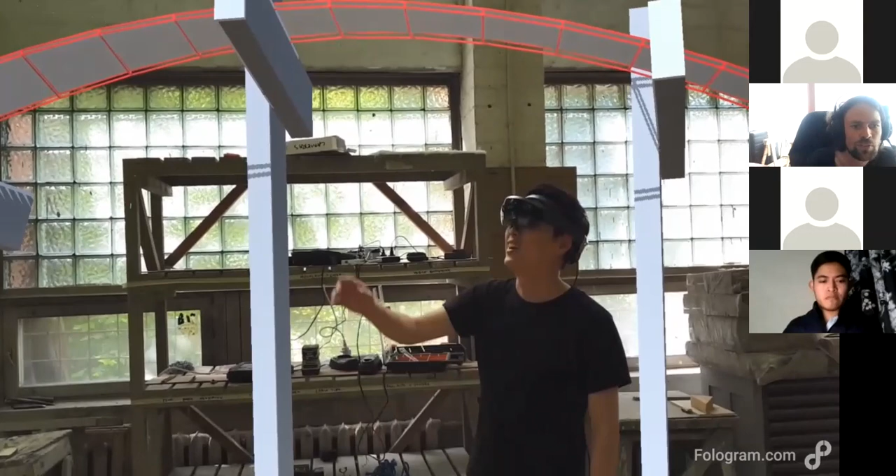So the only information that you actually need for fabrication is just the shape of the part in Rhino, which is pretty amazing. When we first started building the pavilion, so this is in July now, we initially were showing where all of the formwork has to go. Later on in the process, we just showed the strip, and we made up the positions of the formwork just by eye, matching the geometry of that strip.

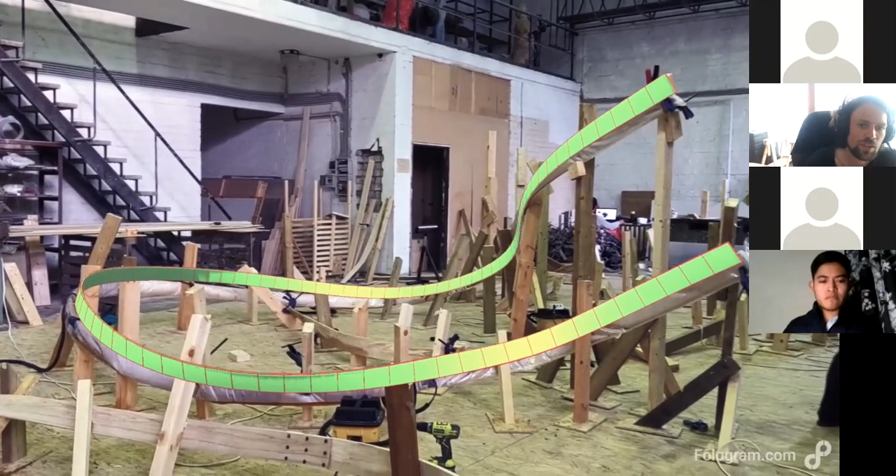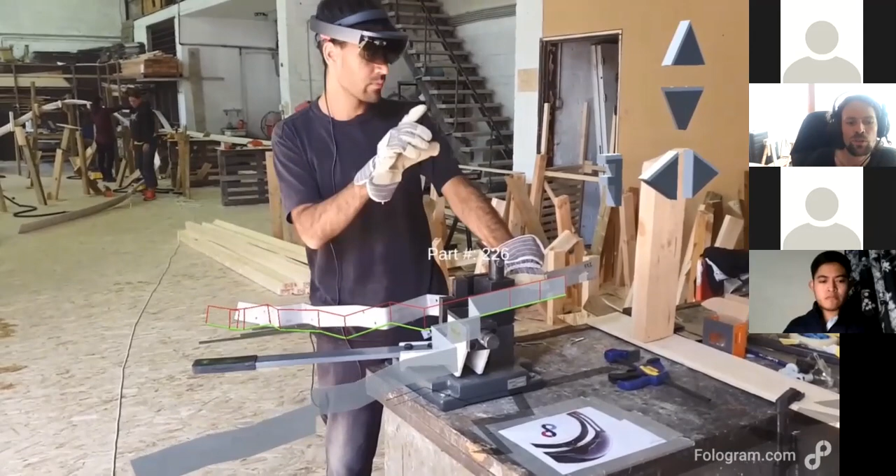This is showing bending each one of the brackets. So it's a bit like that pipe bending before. You have a simple application showing you the exact geometry of each one of these bends, as well as a simple user interface so you can step through each one of the bends. And that let us build all the brackets by hand from stock 40 mil flat bar.

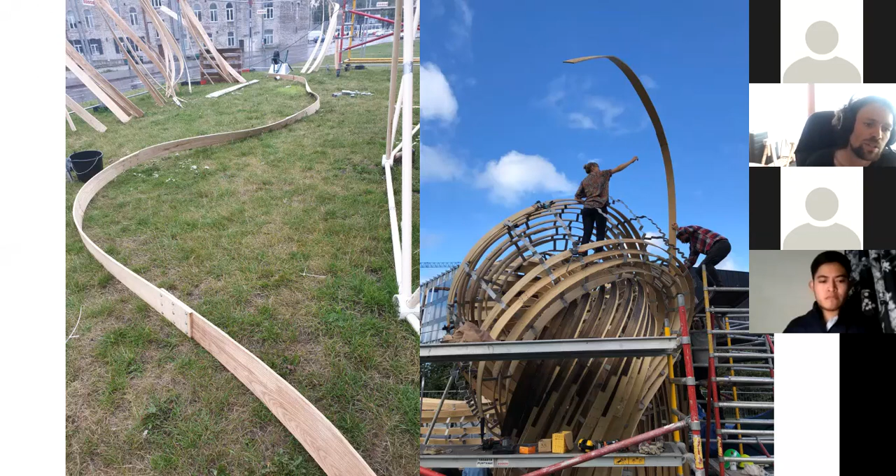And you have a hologram on site showing you how everything goes together. Now the hologram on site is super important because the whole structure is made from flexible materials. It deforms under self-weight when we did all the engineering analysis. The individual parts, even though you can precisely steam bend them, under their own weight they also take a completely different shape than the shape they're supposed to.

And so the only way that you can assemble something together from these parts, because they're so flexible, is it's sort of more like weaving something into a hologram that you see than it is just assembling like Lego bricks or something like that. It's this process of really massaging material into a desired shape. And that's exactly what we did.

So this is sort of seeing the structure on site, these huge long parts standing up in the sky, just trying to gradually weave these steel and timber pieces together. So the language of this pavilion, we hope, expresses how it was made. So it's trying to show and capture the qualities, again, the flexibility of this timber material, and sort of demonstrate the capacity for enormous variation that's facilitated by an incredibly simple fabrication process and production chain. Like it's just one length of timber and one length of steel.

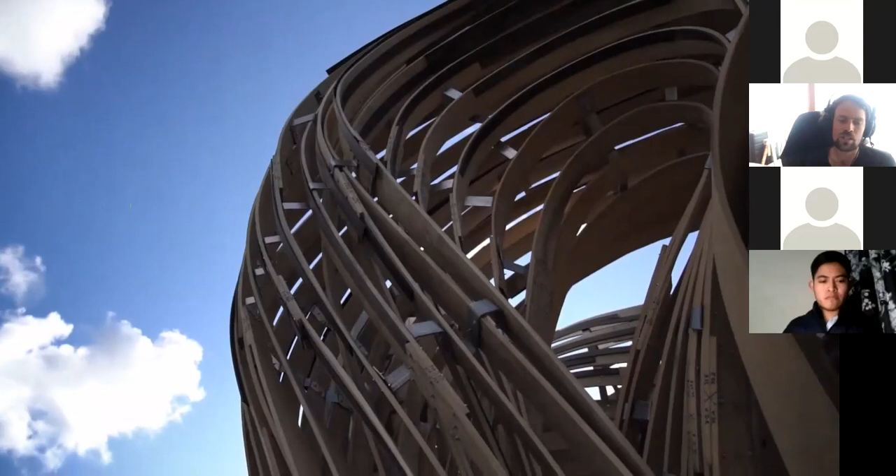And the simplicity of the tectonic system as well, I think, is really important. So it's just a shell, but that shell does all sorts of things. So a wall becomes like an interior surface. A column can become this kind of canopy. Everything is sort of twisted and lashed together. And the sort of differences between these architectural elements just gets really blurred, which I think is one of the most kind of captivating effects of the structure.

And then the twisting of the strips creates all these really nice plays with light and shadow. And the twisting is just as much a product of the fabrication process as it is something which is, you know, just modeled and intentional. If anything, it's more a product of the fabrication process than anything else. So just a couple of views of the structure, some views of the interior, and then the finished thing.

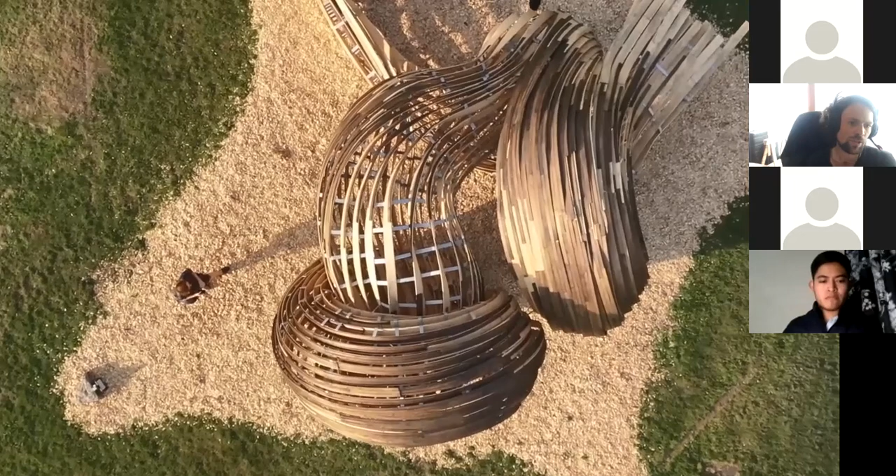So I think that this pavilion, what we're trying to do really is, again, to come back to this polemic position regarding digital fabrication or industrialized construction. We're trying to show what's possible just by leveraging human craft and intuition and traditional approaches to making, very, very simple production chains, one type of material, or in this case, one kind of timber, one kind of steel. And yet you're able to produce wildly complex formal outcomes. And all of this is also done under extremely tight time constraints and extremely limited budget.

I mean, we're only able to do it really because of the incredibly generous support of a huge team of really fantastic volunteers who traveled to Tallinn and donated their time. But the reason that this project is possible really is we were able to eliminate all of the risk by not having to rely on prefabrication of any of the parts.

If we made a part wrong or it didn't fit or it broke or whatever, we were always able to just remake it again because we're working from a very standardized kit of materials and because anyone can put the HoloLens on and assemble any of these parts. So all of the skills just become really evenly distributed throughout everybody on the design team, which is really, really exciting.

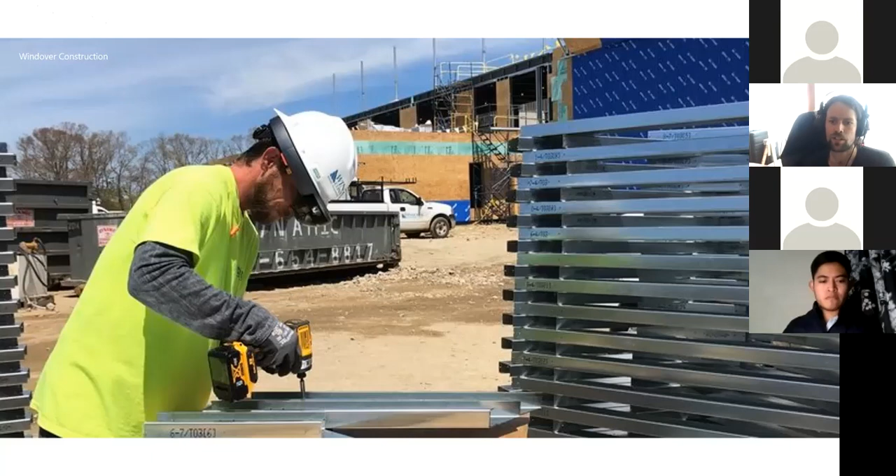All right, so to wrap up in a couple of minutes, what's next in terms of mixed reality, especially in industry? We're seeing lots of things happen in industry right now with mixed reality, which is really, really exciting. So companies like Windover are using mixed reality to assemble steel trusses on site. It's a pretty simple idea, really. It's improving capabilities and skills and reducing risk.

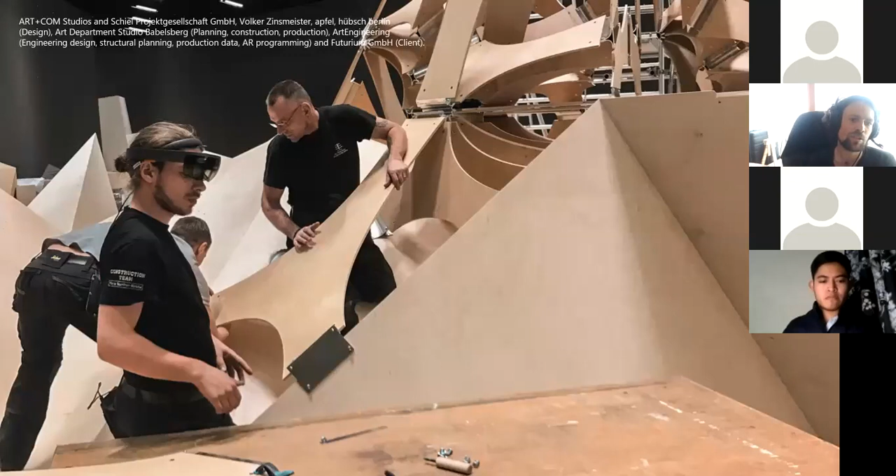We're seeing companies like Art Engineering document projects in mixed reality. So this is a project for Art+Com built by Studio Babelsberg. As far as I know, it's the largest structure that's ever been completed just from mixed reality documentation. They documented the whole project in mixed reality to reduce the risk and provide certainty that this kind of complex, unusual structure would be built without any mistakes, because they were concerned that some of these self-similar parts would be installed incorrectly.

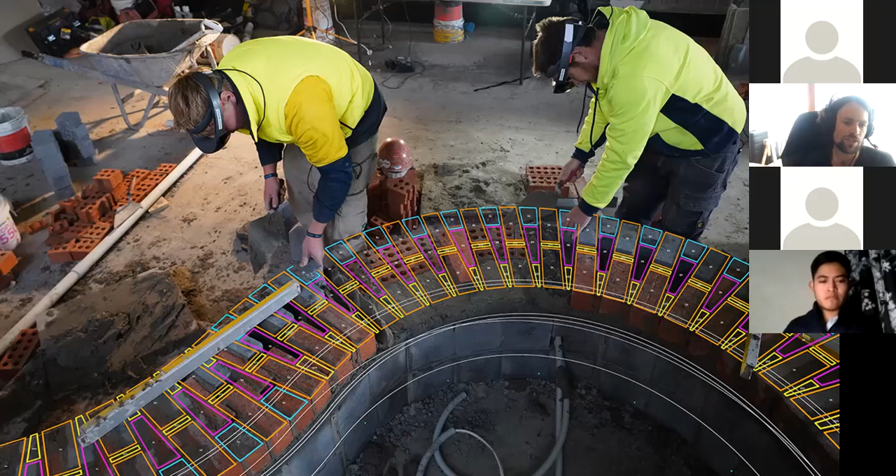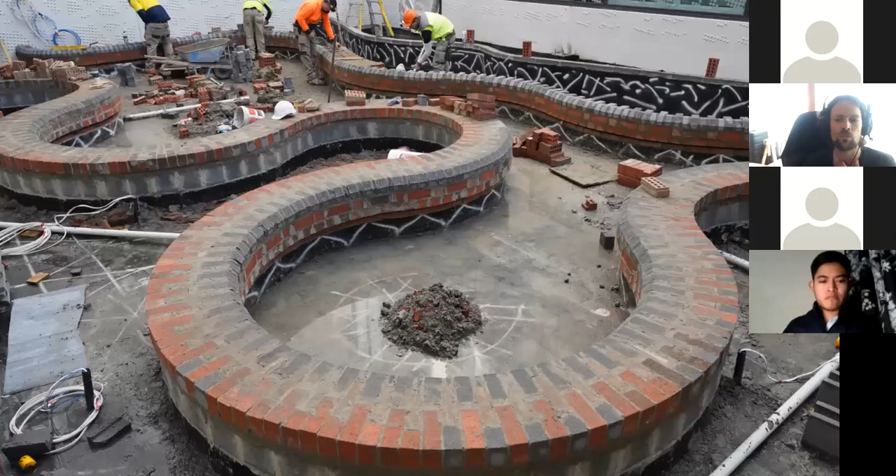With the bricklayers, Colin, that I showed you earlier, we've since done projects on real large-scale construction sites. This is the Royal Hobart Hospital, where we did a whole lot of brick benches using mixed reality guides, so at a much larger scale than the wall that I showed earlier. And this gives you a sense of the scale that's possible to achieve working with mixed reality right now. Everybody always asks, what's the precision? At this scale, the average precision is about 7 mil, depending on how well you follow best practices, which is extremely important.

And all of this, to sort of sum up this uptake from industry, there's a few things that are just super important to point out. It's not necessarily about making things quicker, faster, cheaper for industry. And that's definitely not what interests us as designers either, as hopefully I've pointed out many times in this presentation. What attracts industry to this technology is that we're finally able to bring some technological change to their industry that improves how they're able to work. It allows them to extend what they can do.

It allows them to bring the next generation into their trade, to make their trade more attractive to young people. It improves how they're able to train that next generation. It improves how they're able to collaborate. It improves the skill of their team. It allows them to work better. It makes the quality of their work higher. It provides them with more certainty. It means they make fewer mistakes. And then on top of all of that, it's saving time and money on jobs. That's just the icing on the cake, really.